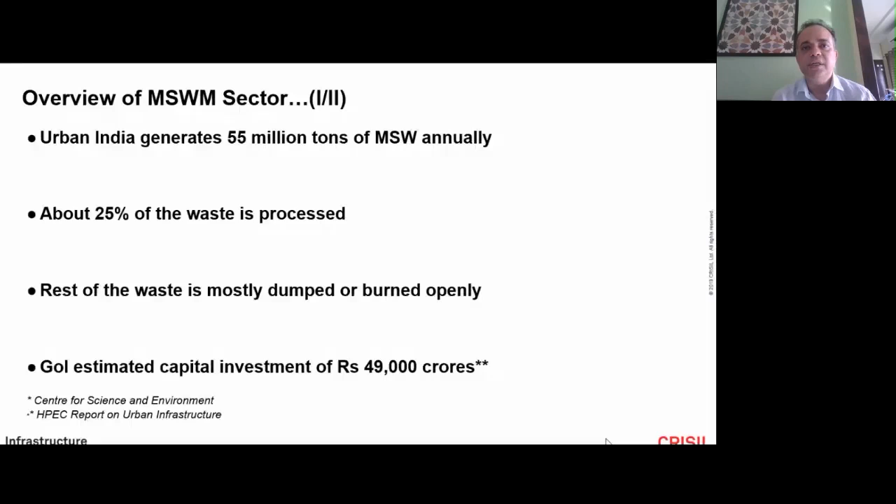So the element of waste processing and disposal required on scientific grounds is quite significant, as you see from the numbers, and the investment required is around 49,000 crores if you were to manage this waste correctly. But the message I wish to relay is that funding is something you can probably make available through various programs, innovative PPP structures, and some kind of dedicated grants. What is important to highlight is the way the entire waste management is happening, right from generation to its collection and eventual dumping or conveyance to the dump site, the sanitary landfill site, or the waste-to-energy site.

But what's very interesting to look at is the waste generation that's going to happen in the country because of increasing income levels, lifestyle changes, and rapid urbanization. If you look at the entire urban population today, which is close to around 40 crores out of the entire population of 120 crores, that's going to reach close to 50 crores or so in the next couple of decades. What's going to change is the waste generation capacity or levels, which are going to increase threefold by 2030 and ninefold by 2050.

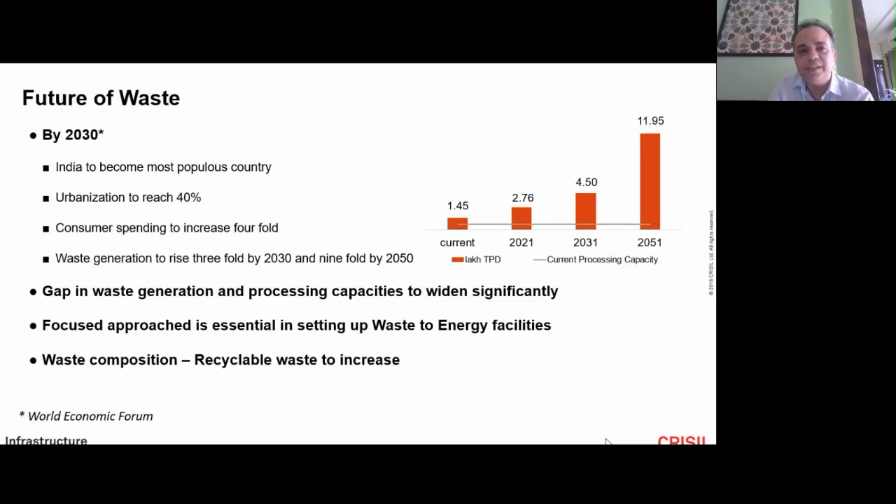There is going to be more recyclable waste, and given that land is always going to be scarce in urban areas, we require a more land efficient disposal strategy, and waste to energy can be one solution. Landfill sites are also being proposed, but we have to make sure not all waste goes into the landfill. What can be recovered has to be recovered. There's a norm typically in our transaction structures that not more than 20% of the waste reaching the disposal site can be put into the landfill, otherwise landfills will get exhausted very fast.

What are the issues we face at the ground level in cities? One is that collection and transportation is happening in a very informal way. The contracts typically awarded to private contractors are very informal, do not have any kind of performance standards, and that impedes contract enforcement clauses. So the informality of those contracts has to be done away with. They need to be more formal and more stringent.

To be fair to the contractors, one has to ensure they get an adequate contract duration period, which will allow and motivate them to invest. Short duration contracts of 1 or 2 years impede investments. Typically, investment contract duration has to be around 7 to 8 years, at least that's the life cycle of a vehicle deployed for waste collection.

There has to be good instrumentation to track the waste collection process. There need to be weigh bridges to understand what kind of weight of waste is getting collected and carried to the disposal site, because contracts are typically structured on a per ton basis. So you need good instrumentation to ensure the right waste is measured and payments are linked to actual waste collected. Construction debris also gets mixed in, given the contract being structured on a per ton basis, so the contractor may intentionally mix this kind of waste to ensure higher yield on his contract. This is something that needs to be checked at the disposal site.

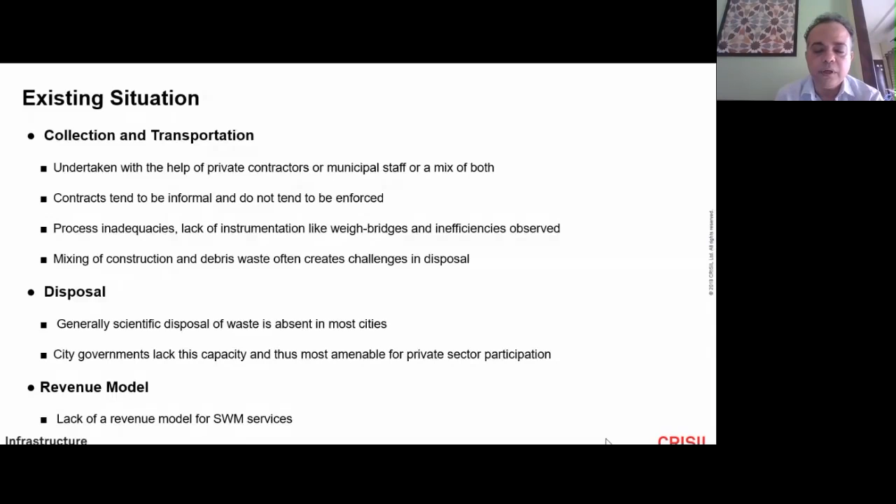What are the challenges on service provision? A lot of the waste to energy players or biogas players demand segregated waste at the disposal site, and we know that segregation is not happening at source. Just levying fines is not going to change consumer behavior, because enforcement becomes a challenge. There has to be a behavioral change, and there has to be an IEC activity that will lead to segregation happening.

Even where there is intent to segregate, the municipal collection system should allow for segregated waste to be collected and transported. Otherwise, if you're using the same vehicle and just mixing the waste, the segregation you collected doesn't mean much. So there has to be compartments within the collection vehicle which allow you to dump waste in the right compartment. Also, collection and transportation requires optimized route models, otherwise it becomes quite inefficient and there is increased cost of service provision.

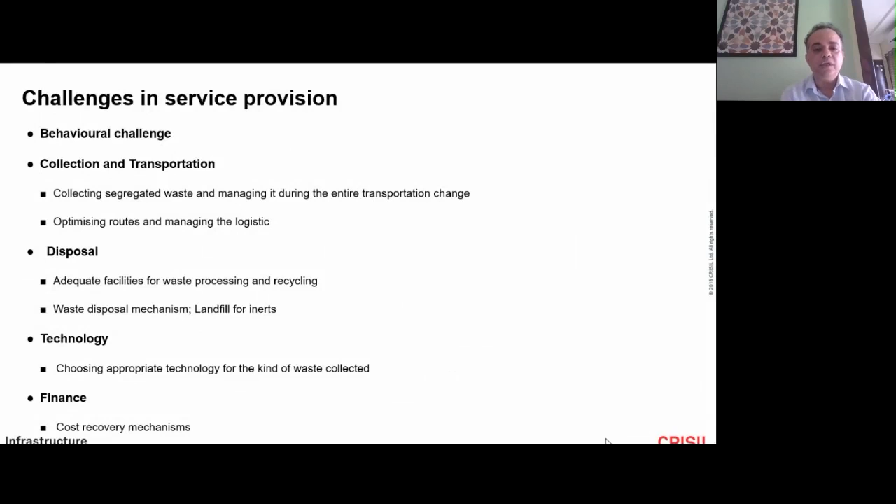The waste disposal mechanism has to have landfills for inerts, and whatever can be used for waste to energy purposes or can be recycled needs to be separated. Choosing the appropriate technology for the kind of waste collected is also important, and cost recovery mechanisms need to be put in place. So there are multiple projects happening in the country, and everybody is attempting it.

But success is proving elusive. It can be because of poor design, or the waste collection not happening in the right way, or the quantity of waste that is the minimum required may not be in place.

So there is an element required to check the feasibility of projects. Another important element in project design is that waste disposal is something the city should focus on. If there is some revenue emerging, that is a bonus, but revenue generation cannot be a driver for the project design. Otherwise, the contractor who bids on the basis of revenue generation may find those revenues not realized, and the entire project goes into getting abandoned, with disputes between the municipal agency and the contractor.

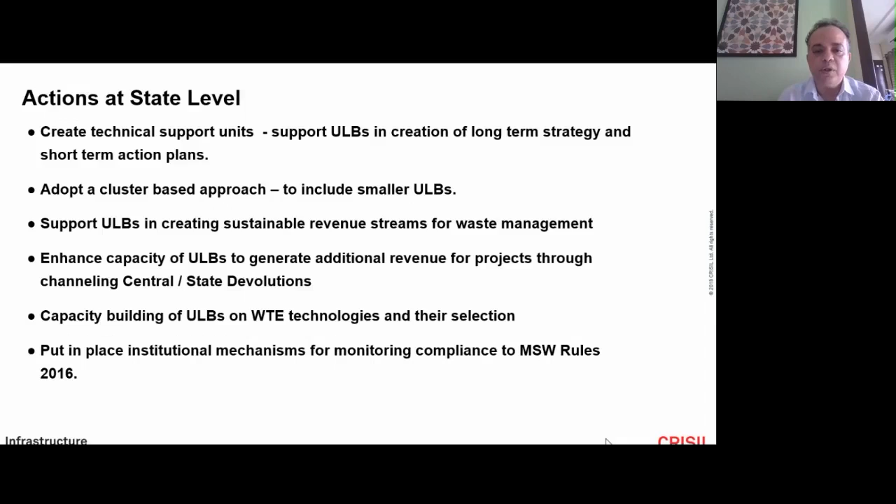Revenue streams need to be created by amending the act. There has to be capacity development of the local body to ensure we are creating feasible projects. And at the state level, they should not only do technical support but also monitoring and evaluation of the project being conceptualized and developed.

At the local level, I think there is a need to create a dedicated department called the Environment Department, which will look at solid waste management in a very focused way, and ensure that there's dedicated staff with the right skill sets to manage this process.

What is happening at the urban local government level is that cities have grown, but city governments have not grown with the capacity to manage this growth. The level of understaffing at the local government level is very precarious. The general impression of overstaffing typically is there at a very low level of unskilled staff, and that may also be changing. But the technical staff required at local level is very important.

There is also a need to engage citizens in a more proactive way to segregate waste better, and that needs a different kind of capacity that local government needs to develop. I think there is capacity to engage with citizens, and the pandemic has demonstrated that local governments have risen to the challenge of engaging with citizens in many states in a very proactive way. That is a good thing that can be leveraged for future activities like engagement for ensuring segregation happens in the right way.

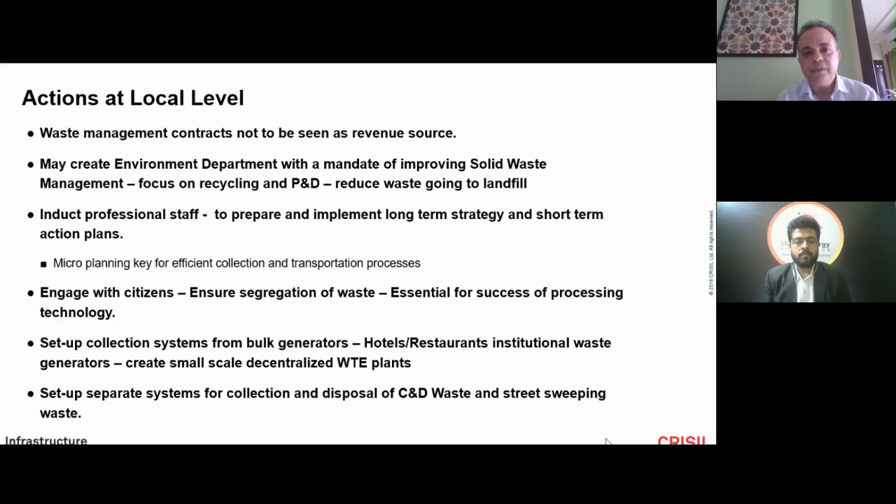So with this, I would conclude my presentation and open the floor for questions.

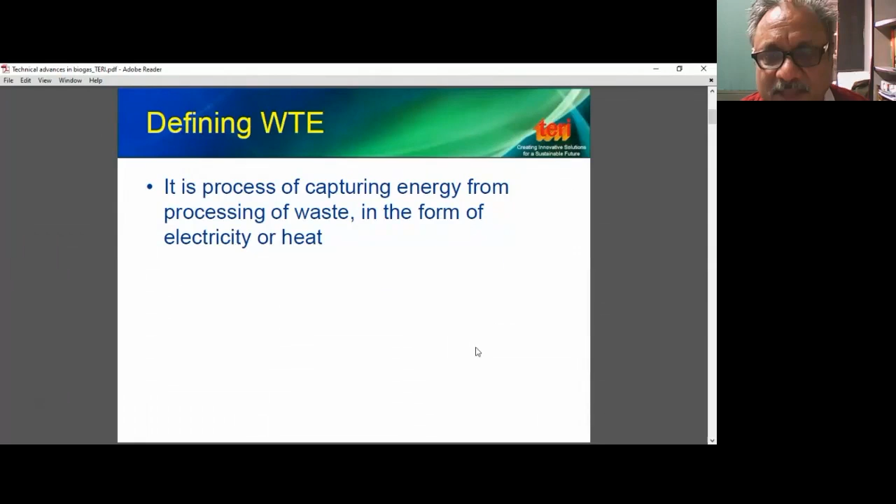So with this context, waste to energy has been discussed in previous sessions throughout the day. I'll start with a slide on why waste to energy projects are a problem, especially when looking at processing municipal solid waste. The way we segregate, collect, and process waste are problems in successfully operating waste to energy plants on a sustained manner over a long time frame.

One issue is variability in waste composition. We all know urban waste streams and daily consumption are not uniform, so our daily waste generation is also not uniform. The composition keeps changing.

In addition, if you look at overall average municipal solid waste characteristics across the country, on average around 50 to 60% of that is moisture. If we don't address this moisture, it can cause wear and tear and corrode the equipment in waste to energy projects. If inerts are high, they can not only cause fouling of the equipment but also cause physical damage to the system at times.

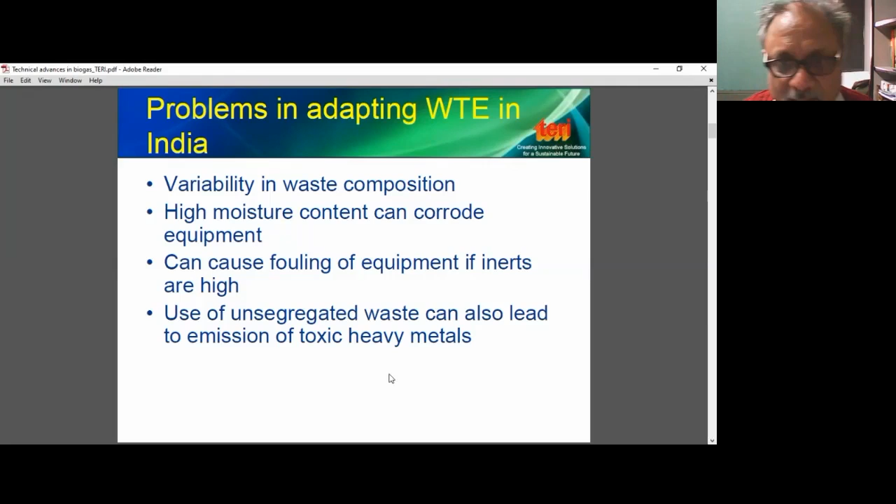Lastly, if the waste is unsegregated and contains toxic constituents because of poor separation at source, combusting such waste in waste to energy plants can lead to emission of toxic heavy metals. Not only toxic heavy metals, but also issues like emission of dioxins and furans if combustion profiles are not proper.

Just to give some historical background on India's experience with biogas - it's a pretty old technology in the context of biogas plants based on cow dung. There were plants under various government schemes installed on a large scale. On the municipal waste side, however...

We started significant projects of significant capacities around the 90s. The plant in Pune was started as a pilot plant using technology from Paques, 5 tons per day capacity, started in mid-90s, was subsequently closed because of operational problems.

There was a plant in Vijayawada using segregated municipal solid waste, 16 tons per day, and a slaughterhouse waste plant at 4 tons per day, with technology from Mailhem. Colonel Rege is here - he would be the right person to explain more about that in case there are queries.

There was a plant in Chennai, and a Koyembedu flower market plant to address flower market waste, of capacity 30 tons per day, based on Austrian Bima technology. Since this was technology imported from outside, there were small problems in terms of maintenance, and the plant had to be closed down for say 6 to 8 months for want of spares. So many times, with imported technologies, timely supply of spares is also a problem - it can hinder continuous operation of your plant.

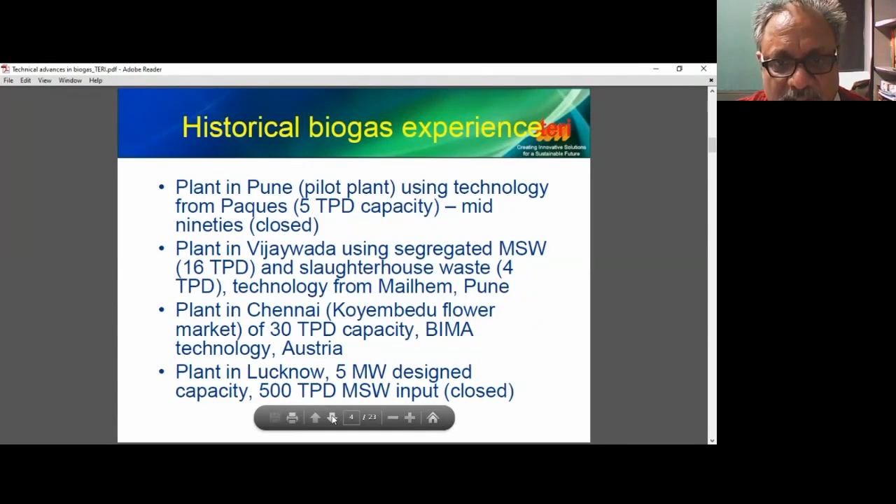I'll try to capture that learning in subsequent slides. I've divided my presentation into two parts: one looking at mechanisms and ways to enhance biogas production in a reactor, and second, after producing biogas, how to make value-added use of it by enriching it further for value-added applications.

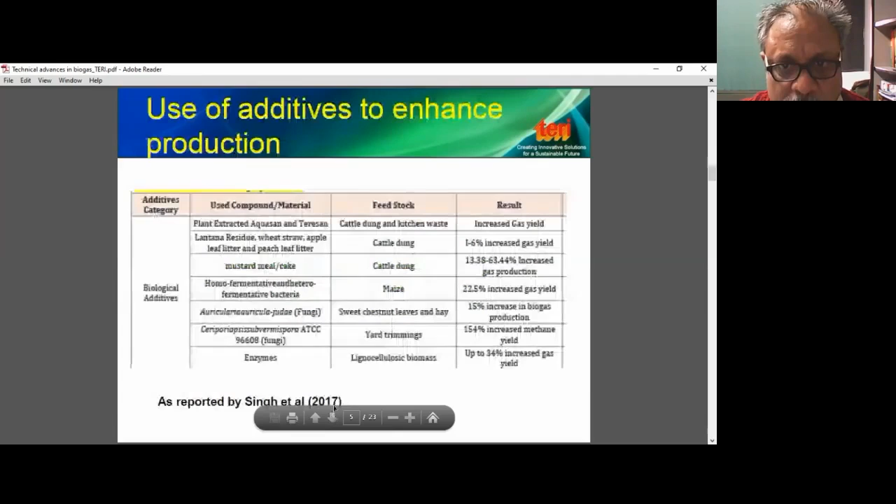Looking at literature, there are two ways to enhance biogas production. One important way is to use additives, which fall into two categories based on various reports and work by researchers for various feedstocks - from cattle dung to kitchen waste to yard trimmings and lignocellulosic biomass. Researchers have experimented with various biological additives.

The first column gives you biological additives which have been experimented with, and increased gas yield to various levels have been reported. This showed that there are biological additives which can actually increase gas yield.

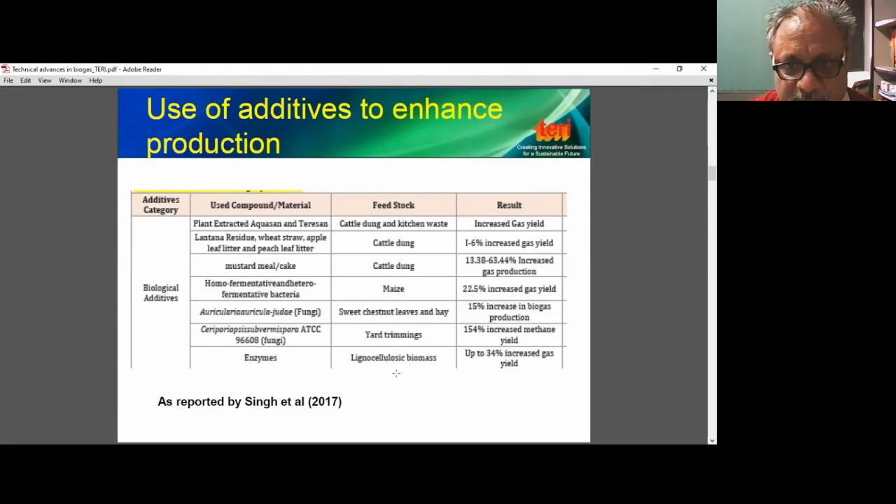The other process and design related changes which various reports and researchers have indicated have resulted in increase in biogas yield. These are simple processes, but they have certainly resulted in increase in biogas yield. Pre-treatment, various processes of pre-treating feed before feeding it into the digester, has resulted in biogas yield increase.

Research also shows that if digesters are designed sun-facing, the sun keeps them warm and the biogas yield is increased. Similarly, researchers have also worked on solar panel assisted digestion systems, where you can not only heat the digesters but also feed heated water to the digester.

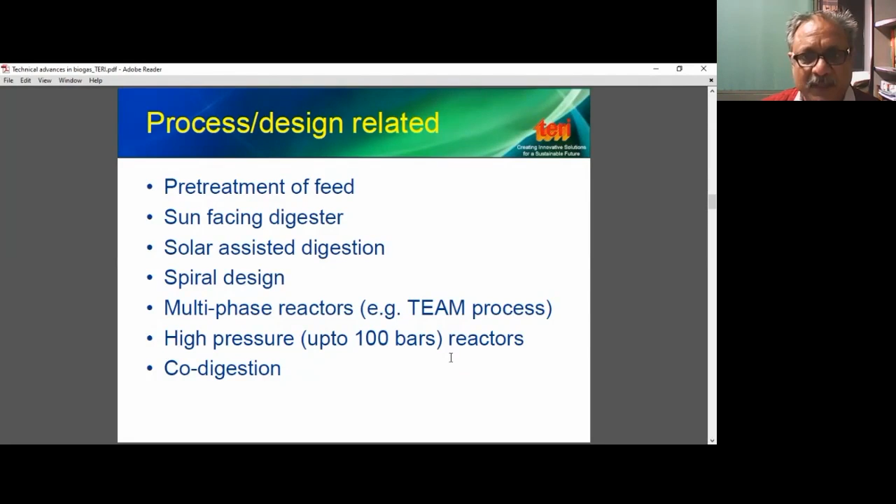Co-digestion for feed with low volatile fatty acid, if you mix it with other feedstocks, has also resulted in increased gas yield. This co-digestion is now especially used for sewage sludge, because sewage sludge has been a problem for long, and not many cities have an effective plan for dealing with it after treating the waste sewage water. Many researchers are now trying to co-digest that with various feedstocks, including municipal solid waste, and optimizing the conditions so there's a significant increase in biogas, and project viability also improves.

It can be a commercial cooker, a rice cooker, a water heater, thermal application into water heating, but it can also go further, for example, conversion into electricity.

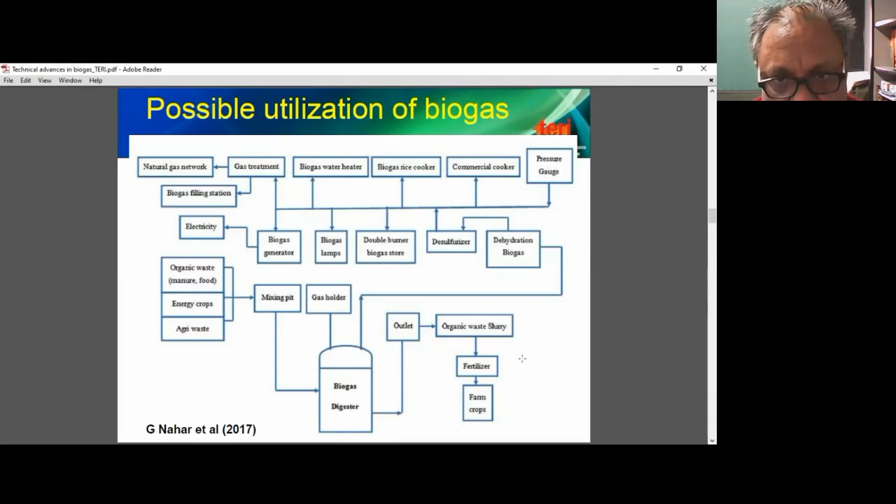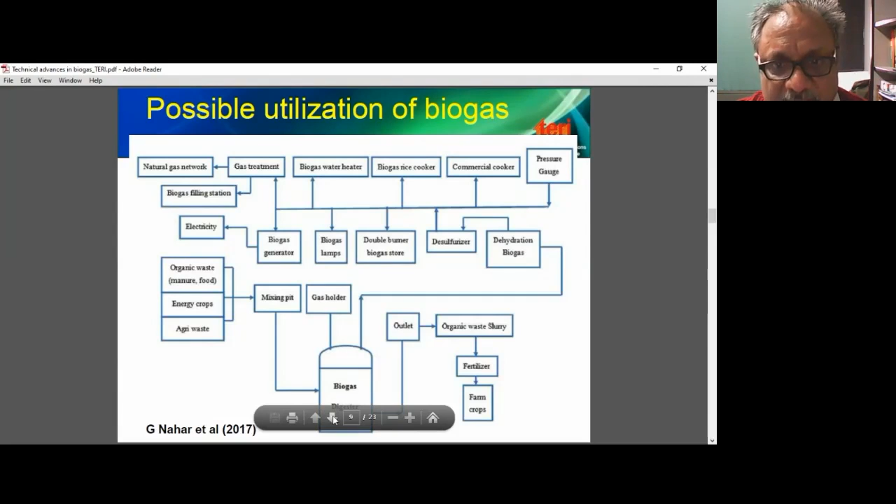Also, the gas which is generated, which I'll discuss later, after further purification can go to the natural gas network. Now the second part of my presentation is about valorization of biogas, how to get more value from the biogas you get, and this falls into the category of upgrading biogas systems.

There are various technology options. I'll not discuss them in more detail for want of time, but we can discuss it if required in the Q&A session.

Water scrubbing, most popular with or without alkali, removes H2S and other gases, and also removes CO2 to enrich the biogas. Solvent-based scrubbing, again to remove CO2, uses chemical absorption. Pressure swing adsorption is very common and very popular now with CBG projects. Membrane separation is slightly expensive to operate, so not much uptake as of now. And the most futuristic is cryogenic separation, done at sub-zero temperatures for CO2 removal, but again a very costly option.

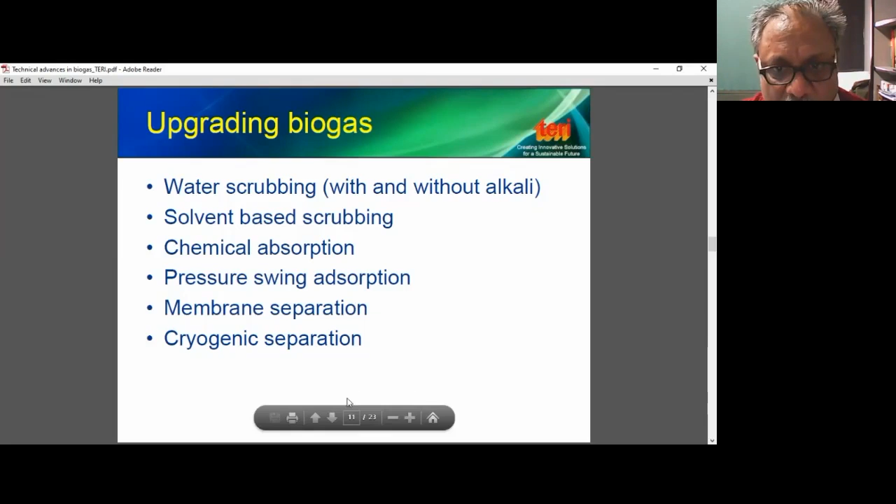Now, looking at biogas history and how projects have developed, we are starting from very simple thermal applications. I'll discuss very briefly the technology which we developed at TERI, since initially I discussed about the multiphasic reactor.

What we have done is come out with a design which is biphasic, for application up to 1 ton, 2 tons per day. The design is fairly simple and easy to operate, and we have separated the acidification process and methanation process into two different reactors. In the first series of reactors, we leach out the waste, and this leachate which comes out after acidification is fed to the UASB reactor.

We have adopted UASB reactor for the biomethanation process, and the gas which comes out is very rich in methane. For most substrates, we get gas with higher than 70% methane content.

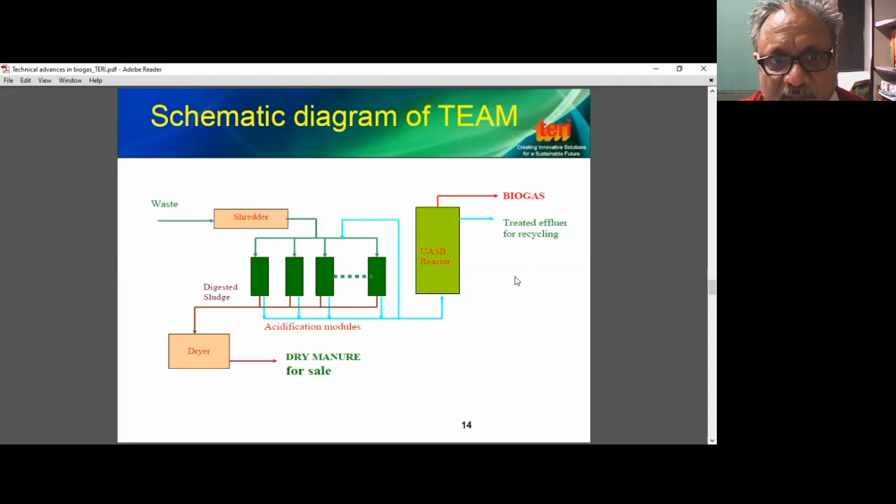The slurry can be processed again, wastewater into dry manure, and water which is recovered can again be used in making slurry in the wastewater system. So in a way, it's a closed loop system with very little requirement for extra water once the process gets going.

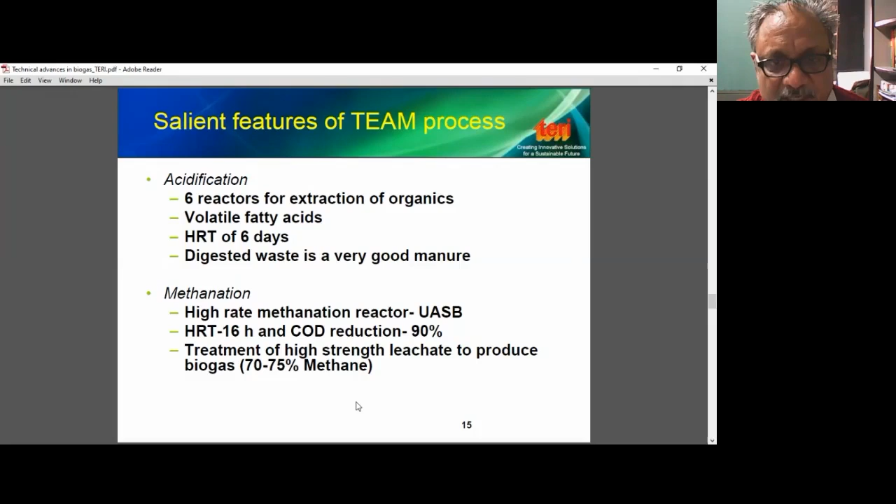So these are some details. HRT, which we can achieve, is 6 days, and digested waste is very good manure. In the biomethanation reactor, the HRT is 16 hours, and COD reduction we can achieve is around 90%.

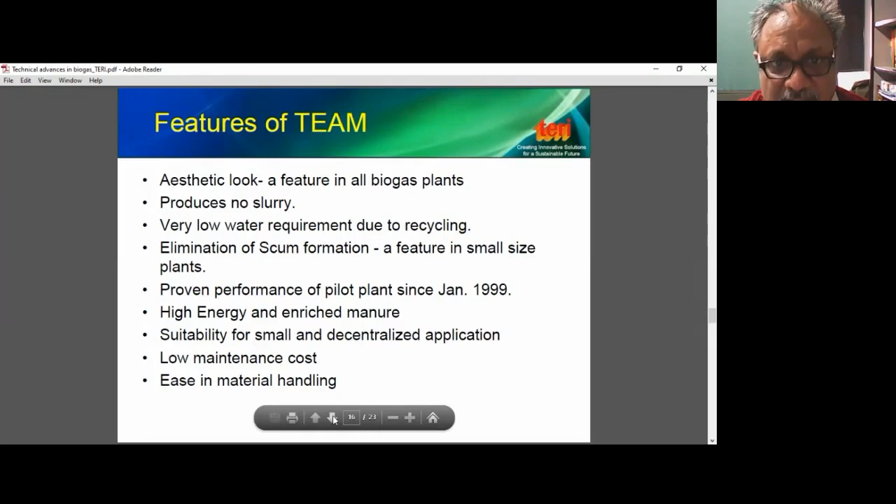It produces no slurry, has an aesthetic look, and very low water requirement due to recycling. Since you are putting leachate into the biomethanation process, scum formation is generally not there. We have been implementing this in industrial premises since January 1999, though there are challenges doing it for municipal solid waste because of variability and inconsistency in what you get as waste.

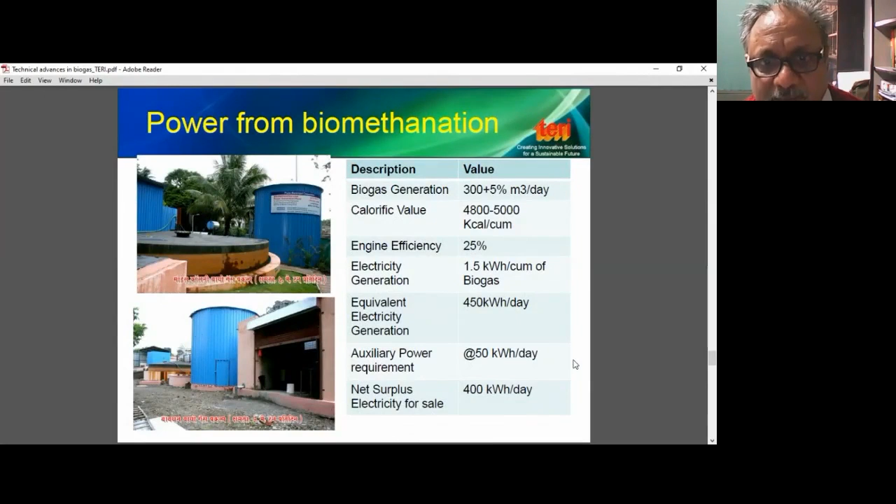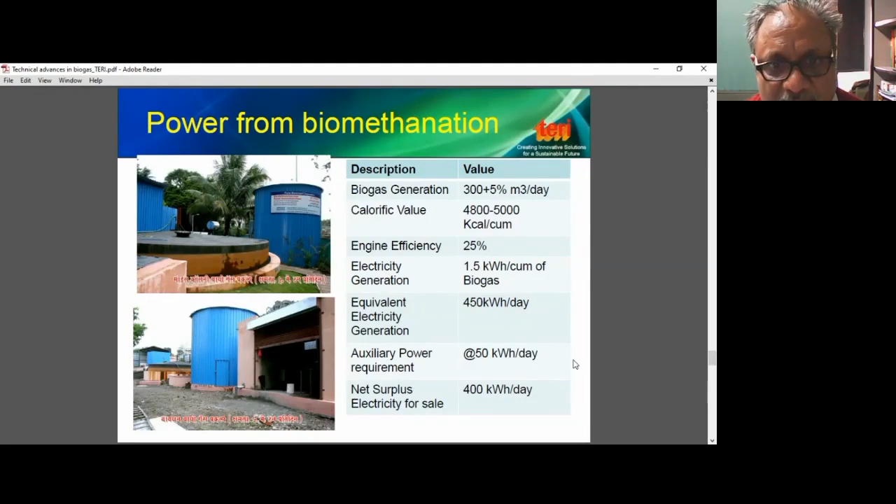Though a power production module increases the cost of biogas plant operation, there are processes which have shown that power production is possible. Subsequently, because of IOCL's purchase assurance for compressed biogas, plants are now starting to operate at a much larger level.

For example, this is a 20 tons per day plant at Indore, installed by Mahindra, with compressed biogas production of 800 kg per day and methane content in excess of 95%.

So this is how the evolution of biogas has happened in India. Given the support now coming for alternative uses of biogas other than electricity, thermal, and cooking applications—since in our country thermal requirement is generally not so much, being a tropical country—this is still looking promising.

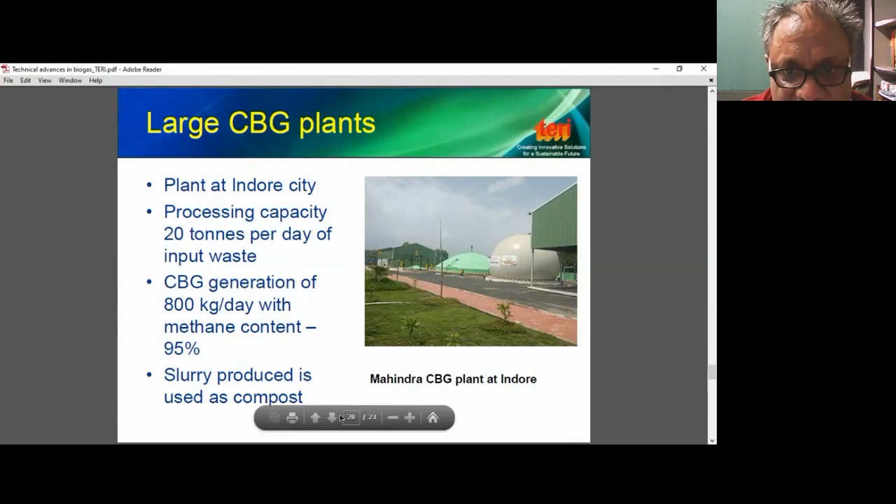So with this, I'll quickly conclude by saying there's still a gap. If you're looking at further utilization of recovered methane into various other things like second generation biofuels or important chemicals and biochemicals, there's still some gap between technologies being developed by various research institutions or universities.

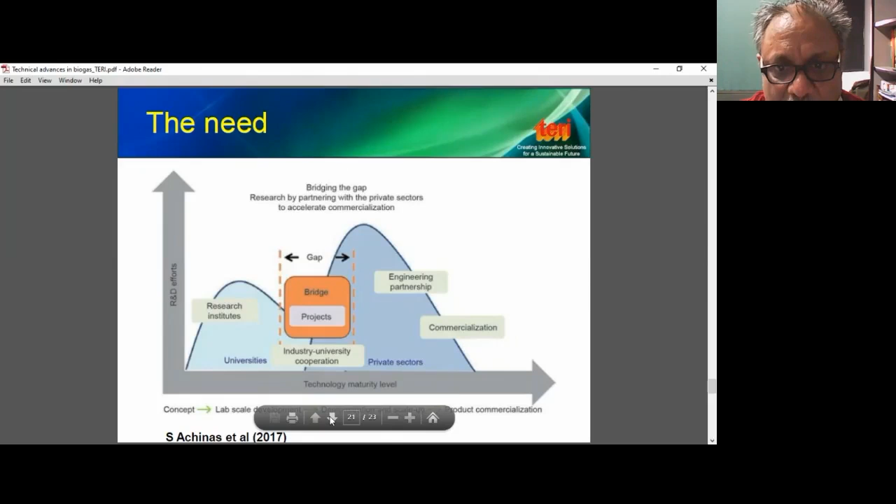To bridge this gap, there's a need for private sector infusion of funds, and there are certain R&D challenges which need to be addressed for making the sector more feasible, especially if we are looking at waste to be valorized.

Because the fact is, on average, the waste which a country like India generates has high moisture content and low calorific value. If the waste can be sorted into an easily degradable fraction, which is our green waste, then there is no reason why biogas technology cannot be successful. With this, I'll close my presentation, and thank you so much for your kind attention.

If there are any questions, I'll be happy to take them up.

The word Mailhem itself is very significant. Mail in Sanskrit means waste, and hem in Sanskrit means gold. We thought of converting this waste to gold almost 25 years ago, when people didn't even think about it. Today it has become the buzzword, but we thought of it at that time.

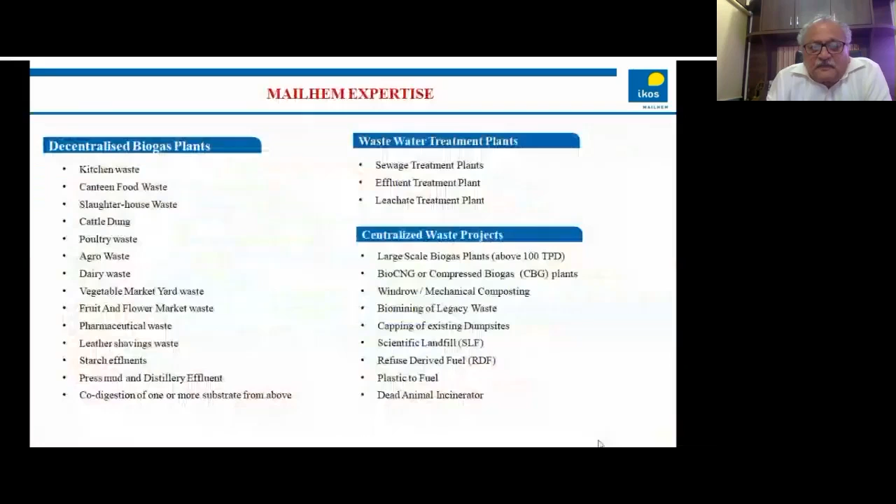If you look at Mailhem's expertise on the left side, anything which putrefies—jo bhi cheez sadti hai—can be converted into biogas. That is our expertise. Jitna bhi smell, the dirty acidic smell, that is a better waste for converting into biogas.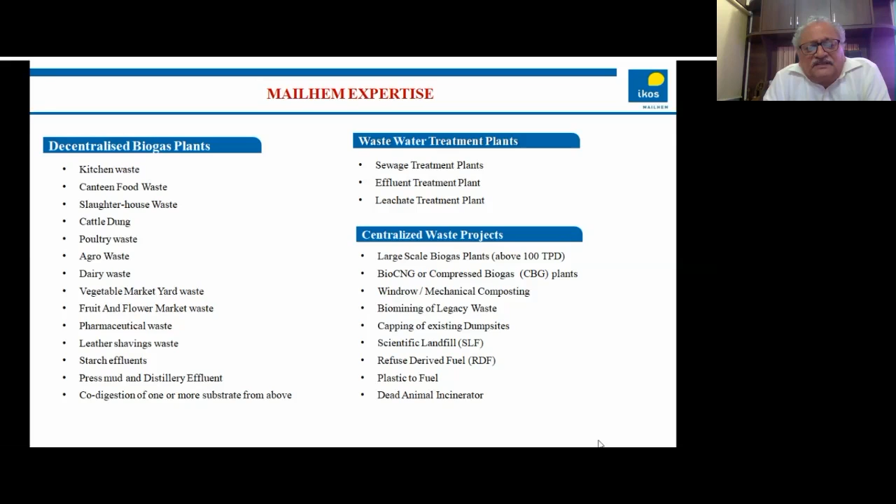On the right side, if you look at it, today we have gone from strength to strength, from small 100 kg to 1 ton plants. Now we do hundreds of tons in integrated solid waste management plants.

I don't have to show credentials. We have more than 325 biogas plants all over the country on different substrates. I would invite any one of you to go and visit any of the plants—you don't even need permissions. We have experience on different substrates garnered over 25 years doing what people are talking about doing today.

If you look at the map, most of our plants are towards the south and central India, and we are now trying to get into Uttarakhand because we have just recently bagged a 50-ton project on segregated municipal solid waste at Rudrapur. So we would have a few more dots in the north also.

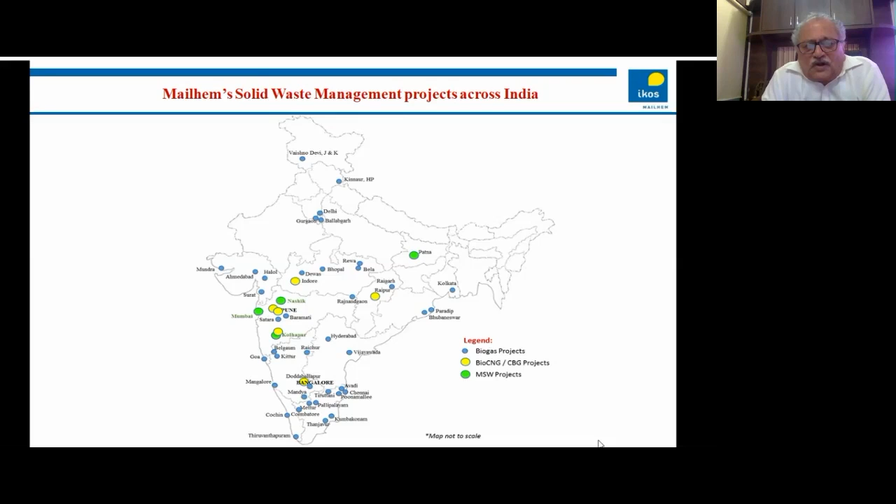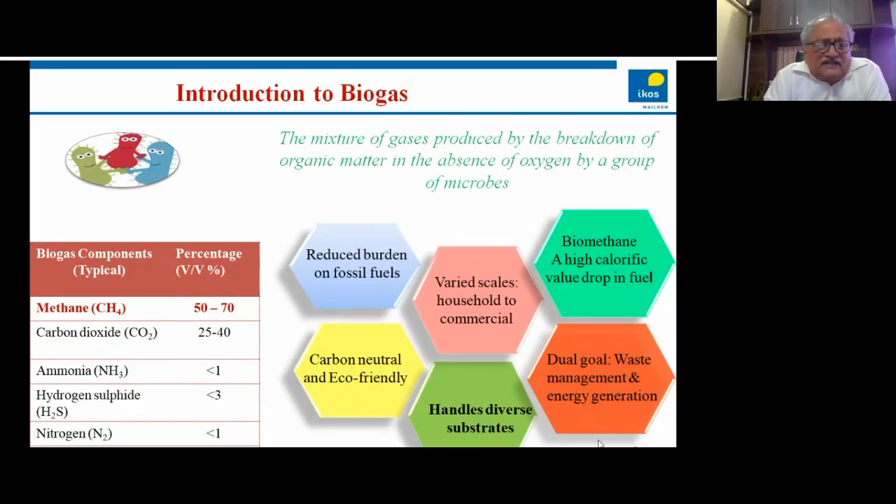But let's get on to the biogas. I'm not going to get into much detail since Pandey Sahab has already explained it. Basically, biogas composition is about 50 to 70% methane depending on the substrate, carbon dioxide 25 to 40%, and ammonia, hydrogen sulfide and nitrogen less than about 1 or 2%. It's a mixture of gases produced by the breakdown of organic matter in the absence of oxygen—that is the critical part of the biogas plant.

Now the applications—when we started, it was basically for cooking. Everyone thought you were doing a wonderful job if you could replace LPG. Later, we got into the business of generating electricity.

If you recollect, when we started there were dual fuel engines—they used to talk about putting in about 30% diesel and 70% biogas, but on ground it was actually the other way around. Then, slowly but steadily, people started getting 100% biogas engines. Cummins and Ashok Leyland today have 100% biogas engines.

Then we started getting the use for heating—and mind you, heating and cooling are simultaneous; either you heat or you do the cooling part. Thermax absorption chillers could also do the cooling part. Then came bigger electricity generation power plants, with gensets available from GE, Wärtsilä, and Caterpillar.

And now the latest thing is making it into auto fuel. Pandey Sahab explained the upgradation of biogas—basically, if you can make it beyond 90% CH4, you can easily convert it into auto fuel. We now have plants like Mahindra's plant in Indore, and one that was just recently visited by the petroleum minister. This is going to be the future of biogas plants, because all oil marketing companies have been given a mandate to put up a minimum of 5,000 biogas plants.

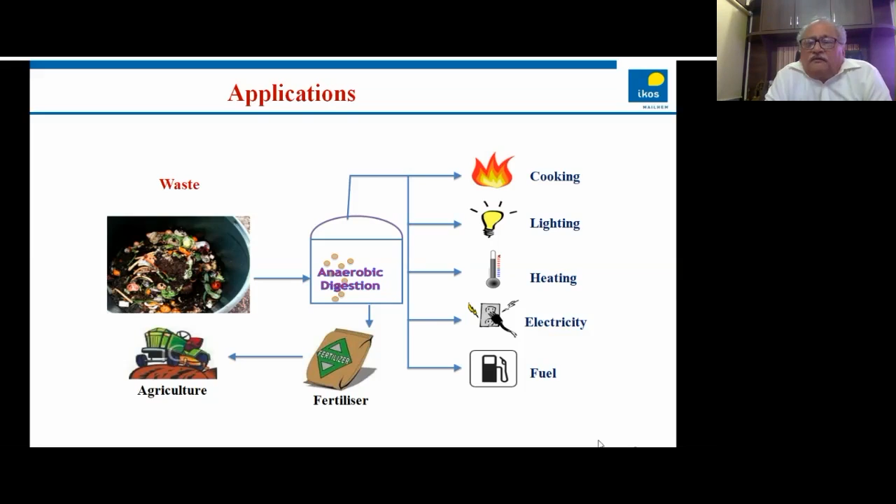The substrate doesn't matter—it could be agro waste, food waste, municipal solid waste, anything that putrefies, so long as you produce 2 tons of compressed biogas. Indian Oil, BPCL and HPCL are willing to buy this from you at 46 rupees. And if you can have a guaranteed buyback, banks will come forward to fund these projects, which was a major issue till now.

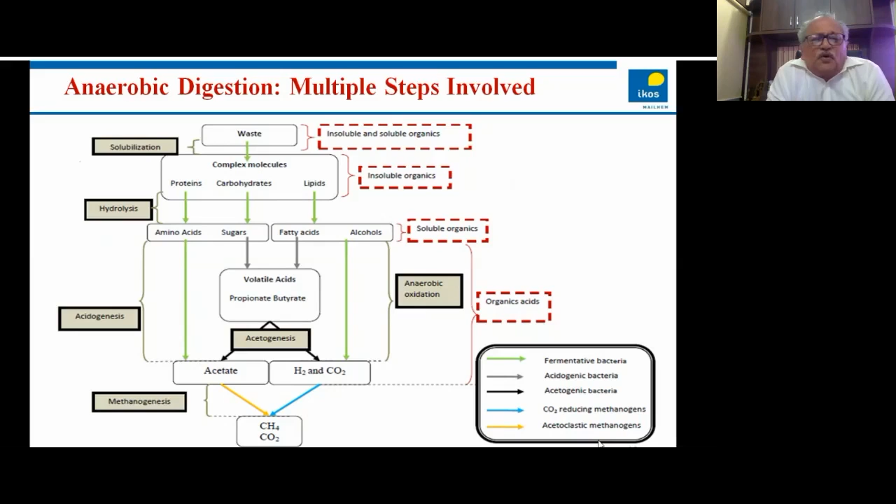The anaerobic digestion process has multiple steps—if anybody is interested, they can always come visit us in Pune or any place and we'll give more details. The 4 stages are solubilization, hydrolysis, acidogenesis and methanogenesis. I'm not going to go into the details, but I'm sure the Mission Energy people will put this up on their website so you can access these details.

For your information, the oldest biogas plant was set up in 1859 in Mumbai. But actually, the commercial use of biogas and its upgradation started in the late 90s. That is how these things have evolved.

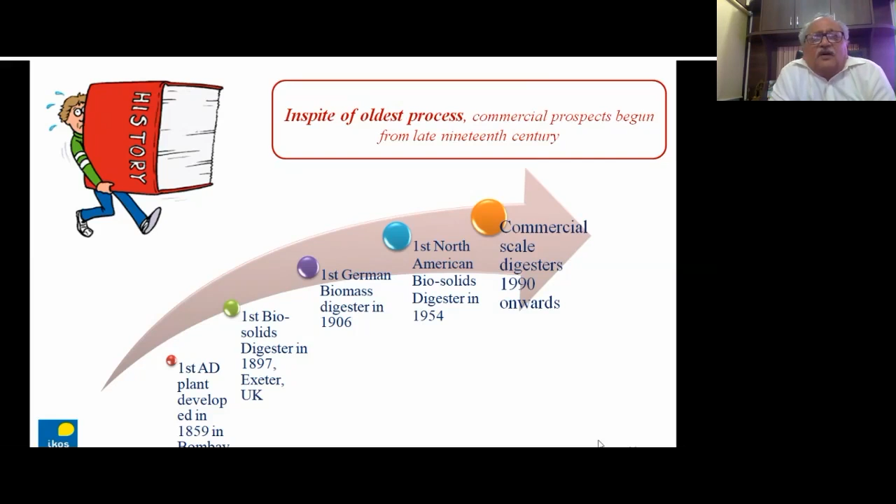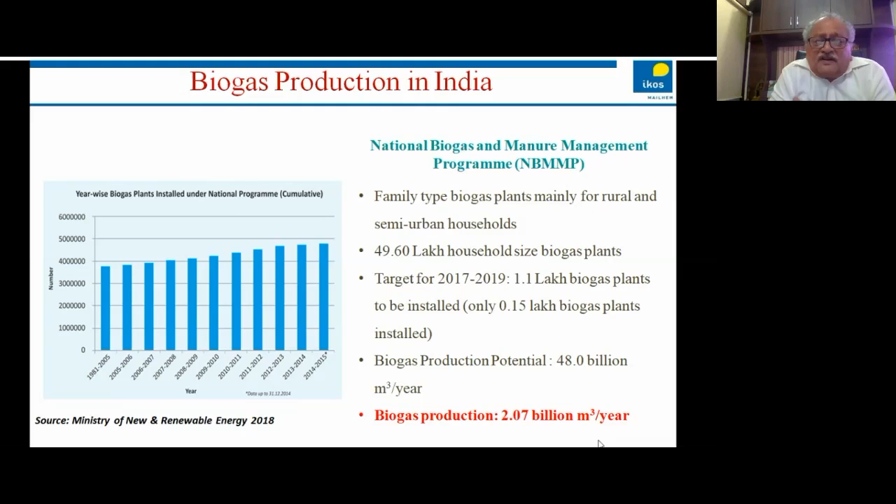I will not tell you more about it. You can open the MNRE site and get all these details on how many biogas plants there are. What I'm more interested in, rather than the small biogas plants, is what is the potential that we have today from biogas plants.

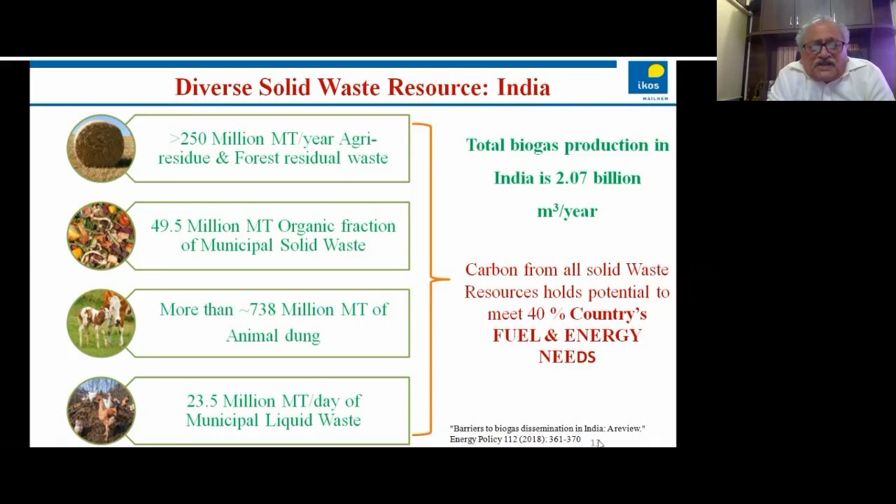The point I'm trying to make, and I want to emphasize this very strongly, is that all this while we've been talking of the potential. I've been in this line for more than 25 years, and I'm hoping that the day will come when this potential will be generated on ground, and it will not only remain a potential.

Now, what was the problem? Why couldn't we do it earlier, and why are we talking of it now? Because earlier, most of these biogas plants were low-rate biogas digesters, the KVIC designs, which were very good for rural energy and rural villages, but couldn't sustain at higher capacities. Then we had different types of biogas plants.

Whatever the problem, there was no mixing provision. The hydraulic retention times were 30 to 100 days. The organic loading rates were very low. The entire substrate which we were feeding into it was never being fully utilized. A simple example is your gobar gas plant: you put in the entire cow dung, and most of it, barring 30 to 40% which is converted into biogas, comes out as slurry.

Of course, it is all right in the villages because you can use that slurry which comes out, the 70% unused material, as manure for farms. But this cannot happen in the cities. What you are looking at is much better digestion for the substrates being fed. You want more than 90 to 95% of the substrate fed in to be converted into biogas.

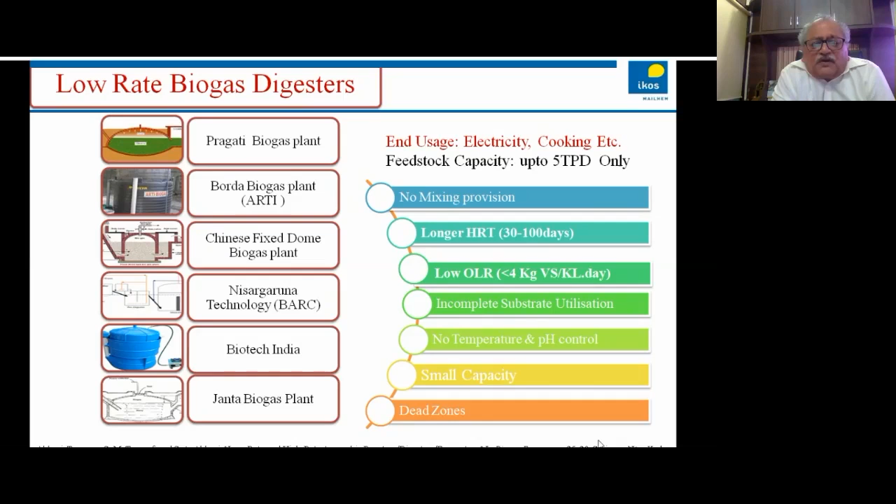Then there were no temperature and pH controls, and that is the reason why we had so many problems with these biogas plants. These plants could only be of small capacities, and most of these had dead zones. The dead zone means whatever substrates were put in were not fully utilized, so at a certain stage you have to open them up and remove the substrates which were not being converted into biogas.

This is a summary of the drawbacks of the existing low-rate solid waste anaerobic digester technologies, which were being used for some time, till the 90s or late 90s.

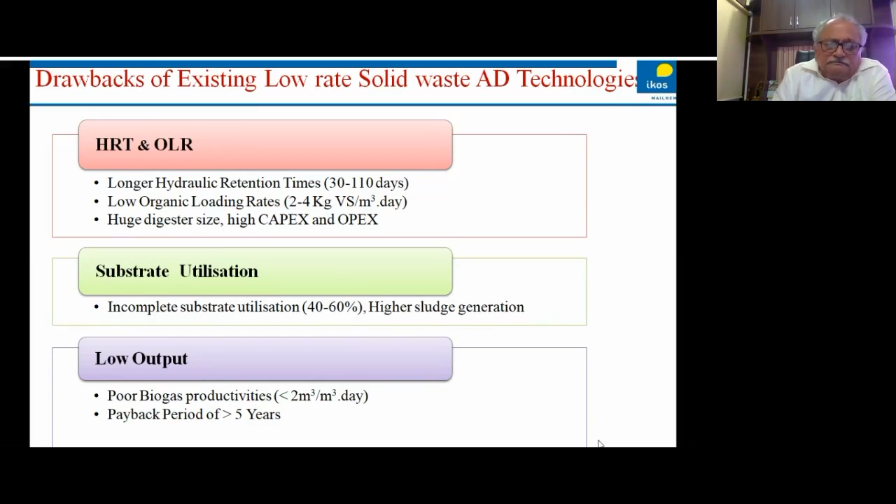Now, how are we trying to improve the biogas yields and productivity? The first and foremost is pre-treatment. Earlier, biogas plants only talked of organic waste like cow dung, human excreta, or at most food waste. Other substrates with plenty of lignin could never be used, and that is why substrate pre-treatment has assumed a very important part in this biogas yield improvement.

Then you can have fortification with lacking supplements and additives, which you can add to get much better production. Similarly, there have been phenomenal improvements in digester designs, which I think Pandey brought out very well, with advantages that have helped us get better yields and production across a number of substrates.

Who would have thought that even stubble burning, which is creating so much of a problem in the northern region, could tomorrow, maybe another year or two down the line, be utilized to generate biogas? People used to say it has too much lignin, you just cannot do it. But today it is possible, because of substrate pre-treatment and the supplements and additives which were not there earlier, to easily utilize these. Today, the aim of everyone in this line is optimization of the reactor operating parameters.

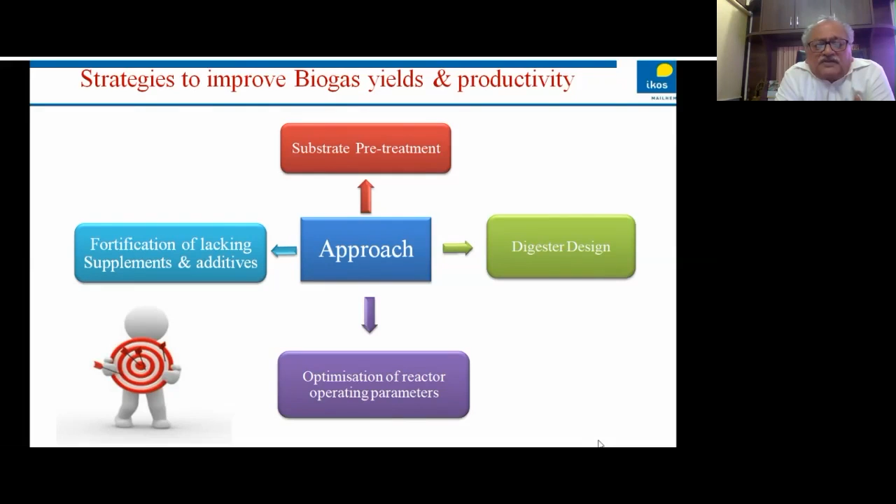Solid feedstock pre-treatment, it could be biological, chemical, physical, and combined. Now all these are available to us today. We don't have to look abroad. We have all these technologies, all these institutes, TERI, ICT, they all have put in a fair amount of effort to get you whatever you need. All that you need is to tap the right people at the right time.

This will reduce hydrolysis time, improve the feedstock degradation by 5 to 30%. You can well imagine how much generation of biogas will be increased if you use these pre-treatment strategies, and how many substrates you can add to your biogas.

This helps because if you recollect, earlier days people used to talk that a biomethanation plant requires a single substrate. But today, what we have specialized in, especially my group specializes in, is co-digestion. It can be different substrates because today the availability is dependent on the season and on the areas where you are putting up your plants.

So you need to think, before designing, how many substrates or what material is available to you, because with my experience I have seen that generally it is not the failure of the technology why these large size biogas plants have failed at times, but the basic failure of logistics. If you do not consider that you are going to get different types of waste in the initial design stages, it is extremely difficult to make it a successful biogas plant.

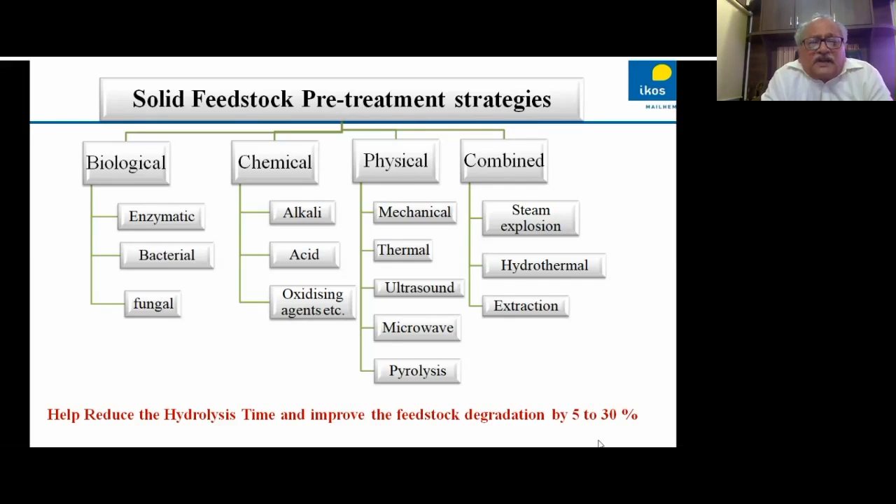If you put up a 100-ton plant, you need to feed it a minimum 50% of capacity throughout the year. You cannot say that for 3 months I'll feed it, and 2 months I don't have the waste so I'll keep it hungry. No, it doesn't work like this. And that is where the failures of these large size biogas plants have come up.

Additives for improved biogas, this fortification which I said, today there are n number of enzymes, micronutrients and trace elements available which will benefit optimum activity of enzymes and microbes for stable plant operation, prevent acidification and prevent biomass washouts. This is very critical if you're looking at this biogas technology at a commercial level.

Mind you, you're investing huge amounts, so you need to give the investor the comfort level that you can produce this not only for a few days, but for many, many years to come.

Advanced high-rate biodigesters, like Dr. Pandey has already said, you have various technologies. We had upflow anaerobic sludge blanket, we started with that, but it was basically initially only for liquid waste. Then through homegrown research and development, we had a modified UASB where we could take substrates which had more suspended solids.

Similarly, the continuous stir tank was a very standard design, especially in German type biogas plants. Today we have made an ideal combination of upflow anaerobic, modified UASB, and CSTR. This is what I'm saying, that advancements are an ongoing process. You've got to do it on ground, learn the hard way, and whatever you learn from past experience you have to put it on for your next plant, and you will always get better results.

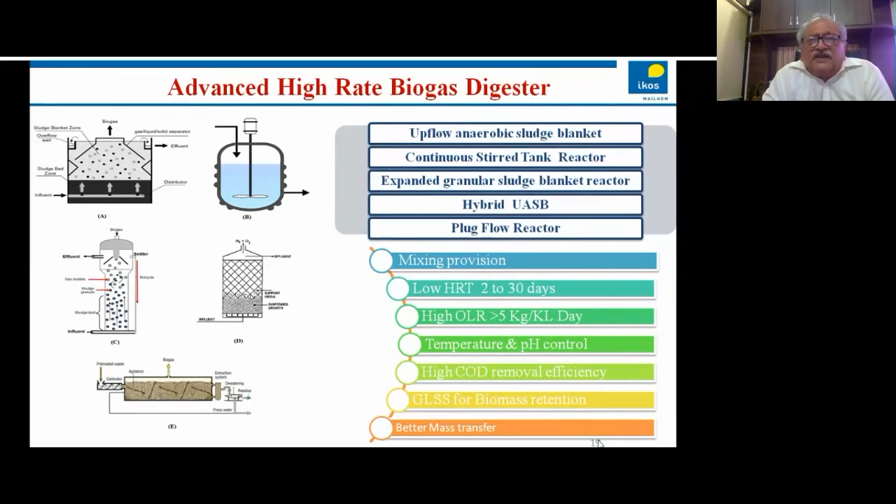Here I would like to say that even dry digesters are coming into India in a big way. Now these dry digesters have an advantage, take for example poultry waste. Poultry waste requires a huge amount of water if you want to use it, but the poultry people do not require this water, so they don't have a use for it. That is why in places and areas where you don't require the slurry or liquid water coming out of it, dry digesters will also be a big success for substrates which require less or more water.

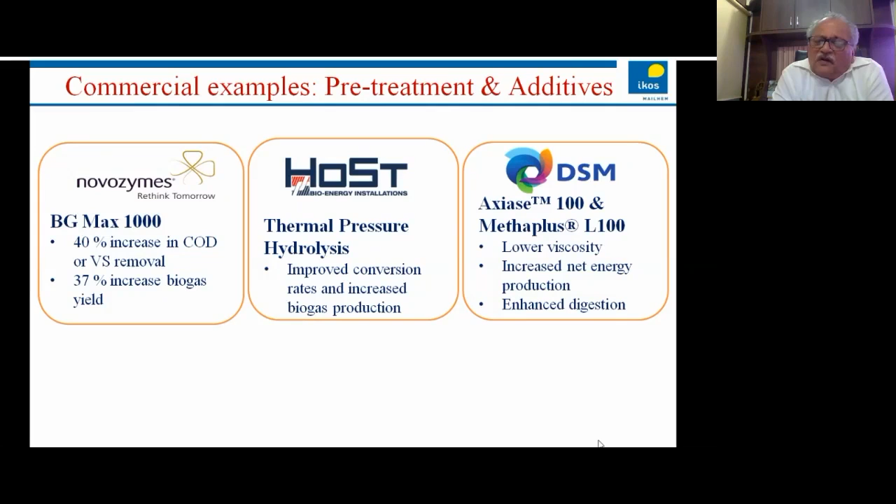This is the same thing I mentioned: shorter HRT, maximum substrate utilization, and high output. These are some examples of pre-treatment and additives available: Novozymes, thermal pressure hydrolysis, and Methaplus L100. These are all things available in India today which can improve the potential of biogas.

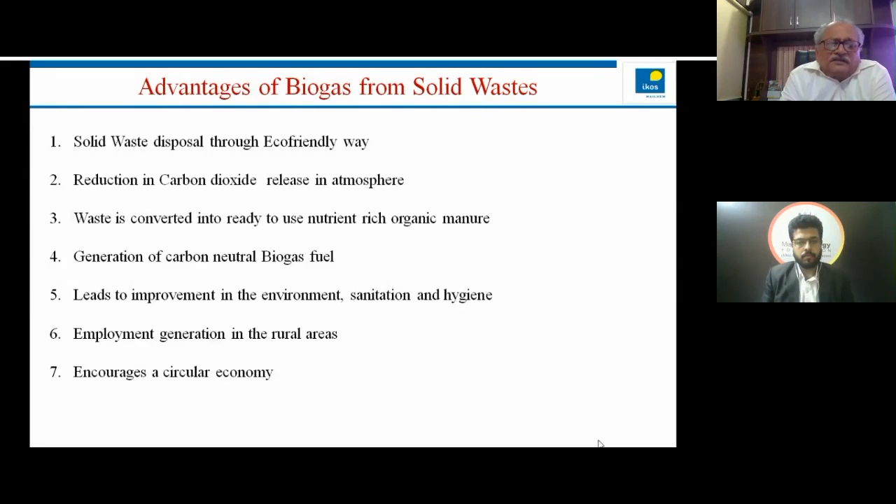Being in this line, we have got a few accolades which I would just like to flash. We were awarded on the first anniversary of Swachh Abhiyan on 2nd October 2015, the award as Garbage Guru, by no less a person than our Honorable Prime Minister Modi. Very recently, we got the award for Operational Excellence in Biogas by the Indian Biogas Association as a winner. We have been concentrating on the quality.

Way back in 2012, we had the Quality Council of India Award for maintaining quality in biogas all over the country. Today, like I said, we have been declared, at our Nashik plant of 500, as the best city compost supplier. So this is the one, and last but not least, one was given a Lifetime Achievement Award.

Jokingly, when receiving the award, I said, when you give a Lifetime Achievement Award - this was in '16 - we are generally either kicking him upstairs or asking him to call it off. But I am one person who, till the last day, has that passion, and you'll keep hearing me in these biogas sessions, whether you like it or otherwise.

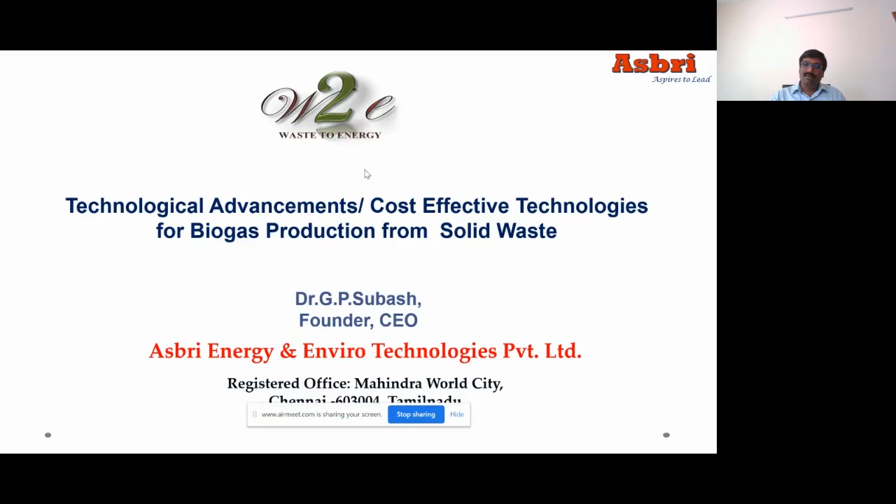So thanks for the opportunity to present about this technological advancement in the production of biogas from solid waste. Our company, Asbri Energy and Enviro Technologies Private Limited, is mainly focusing on biogas and bio-CNG production from various organic material. Here we are mainly focusing on gas which can be from MSW, or from other industrial and other applications, that is, from waste.

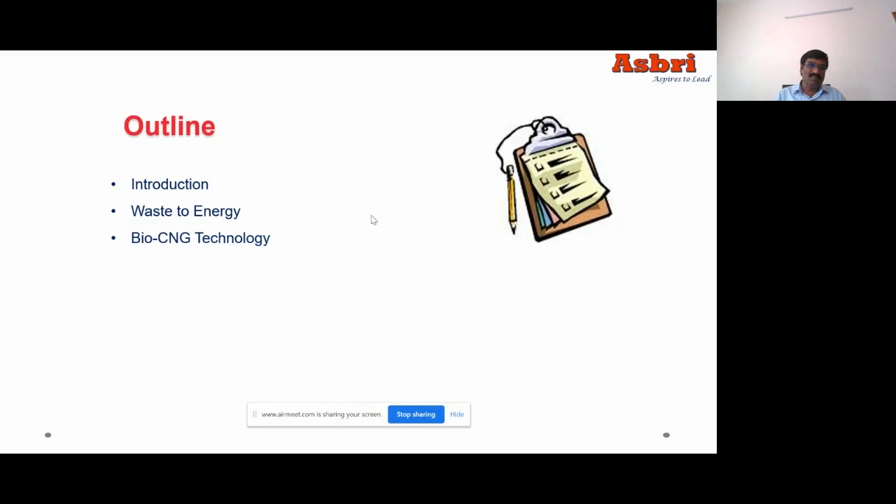I'll be giving the introduction about what biogas is and other things. I think a lot of people already covered this, so I may skip it. Then what is waste to energy at present, and what is bio-CNG technology, so I can discuss that. This is the current scenario in India.

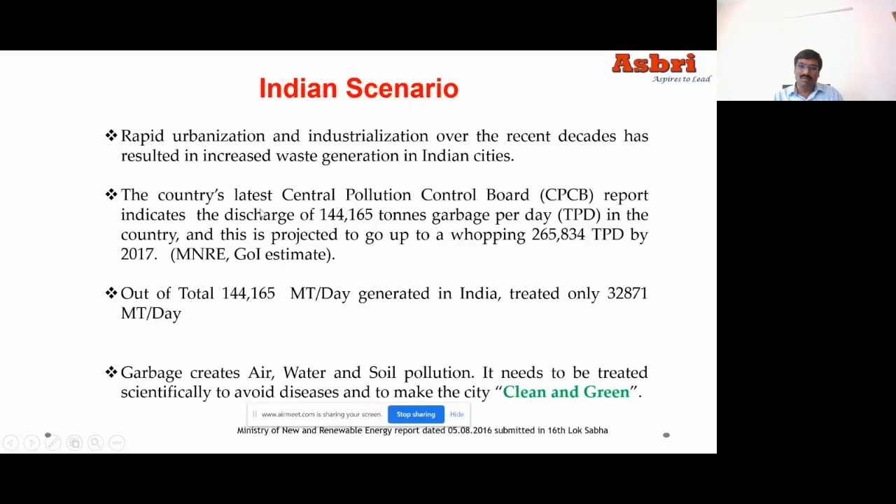These are CPCB data and MNRE data, I think from two years before. So even you can see there - in India per day we are producing around 1,44,000 metric tons of organic waste. I'm talking about only the municipal waste. You can see we are treating only around 32,000 of the waste. That means in this field a lot still needs to be done, and even for companies entering, they have huge potential to work on these bio-CNG and biogas projects.

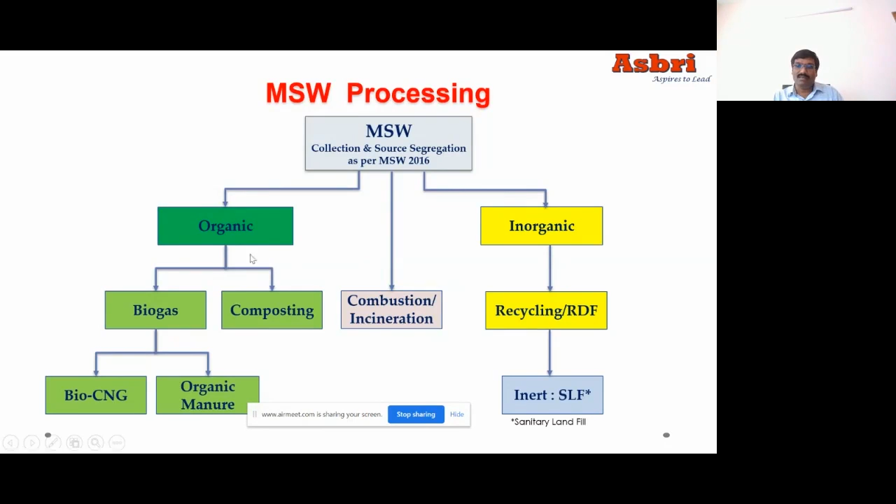At present in India, MSW processing is usually divided into 2 to 3 categories. The mixed waste is first segregated into organic and inorganic. For smaller projects, the organic waste is composted as is, but for bigger projects, say 50 tons and above, it's viable to go for biogas and bio-CNG. The byproduct from biogas projects is organic manure apart from CNG. The inorganic materials like plastics go to the material recovery facility, where we take out RDF material, and the inert material goes to the SLF. This is the technology presently used in India.

After the MSW 2016 rules, there is now great concentration on new technologies for scientific waste disposal. The municipal corporation also enforces rules on bulk waste generators and citizens that they have to source segregate. Normally for small projects, the cost is usually high, so there should be decentralized facilities where the municipal corporation or other bodies can send their waste for processing.

The simple solution will be biogas. I'll skip this, just an introduction of biogas.

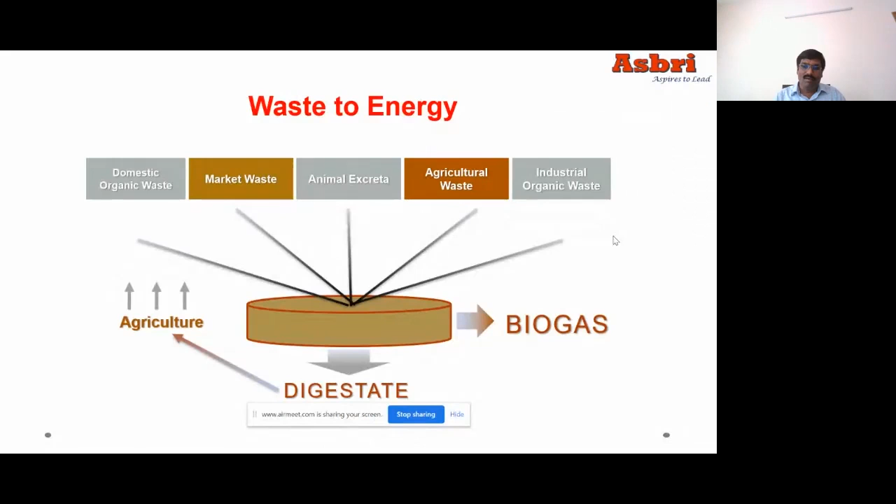Whenever we are designing a biogas plant, it should be a multi-feed system. As Mr. Colonel Rege was mentioning, we have to go ahead only with multi-feed, then we will not land in trouble. If you concentrate only on one waste, there will definitely be issues in the future. The digester may treat domestic waste, market waste, animal excreta, agricultural waste, or industrial organic waste. Our digester should be able to treat whatever organic material is available, and convert it into biogas and agricultural manure.

This biogas plant is a green solution. The highest revenue when we produce gas is from cooking gas, as we can sell this biogas by replacing commercial LPG, giving more revenue. The second option is automotive fuel, which is gaining momentum now because of the SATAT scheme. The last option may be electricity generation.

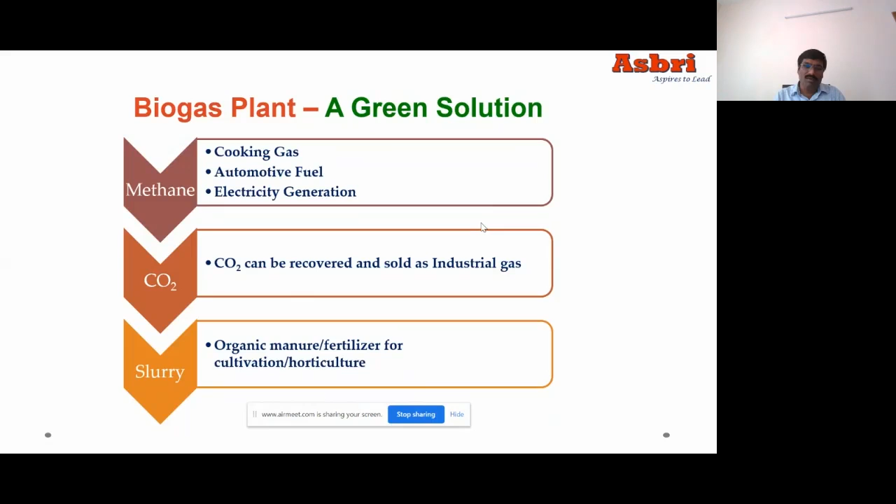Even with advanced new technologies, we are going for CO2 bottling. Biogas has 60% methane and 40% CO2, so the CO2 can also be recovered and sold as an industrial gas, used for welding, fire extinguishers, and other applications. Now we even have the technology to make food grade CO2 out of this biogas. That much advancement has happened. Whatever slurry comes out, we convert into fertilizer. So whatever waste comes to our plant or site, nothing will be wasted—one becomes fuel, another becomes industrial gas, and another becomes manure.

In municipal solid waste, the way is to extract the organic waste out of the mixed waste, then produce gas. Then we need to upgrade or purify it as per BIS 16087 norms, where methane should be above 90% and CO2 less than 4% is a major criteria, H2S should be less than 20 ppm level, and moisture less than 5 mg per metric cube. This is what we need to maintain when upgrading the gas. Once upgraded, it can be used for any application like industry, canteen, vehicle, or whatever is needed, and manure can be used for landscaping or by farmers.

Usually in domestic and hotel waste, we get around 100 cubic meters per ton average gas production. In some cases it's even higher, when there's a very high amount of volatile solids present, we get more gas. Usually in market waste, it will be around 60 cubic meters per ton.

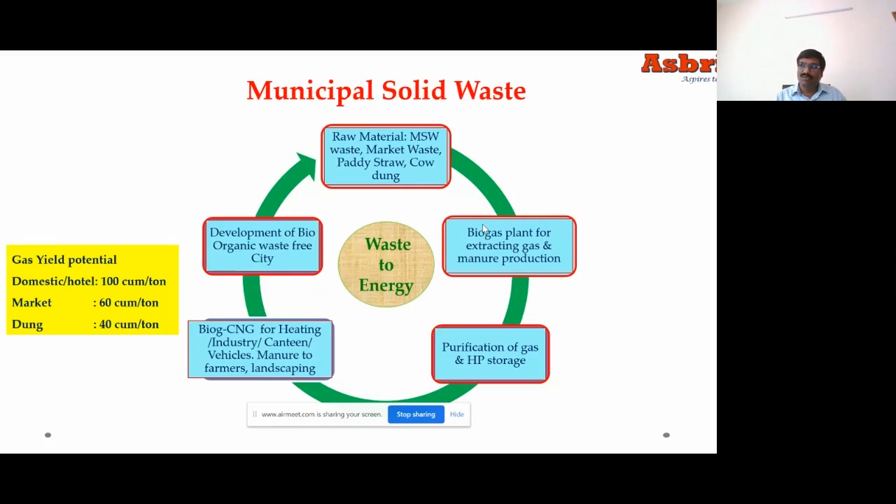Cow dung is the least in yield, but it gives very good stability to the digester. It gives around 40 cubic meters per ton. Usually this is the case in municipal waste.

As already discussed, various applications can be used. For example, when going for automotive fuel, we need bigger cascades to do that. And for restaurants and other applications, we have designed a 4-cylinder cascade which can take the gas, and through a PRS system, we can decrease the pressure required for the line pressure, and use it for any application.

What is the value proposition when we go for biogas? Usually this is better combustion than LPG, because LPG has a higher hydrocarbon, and here in biogas it's mainly methane. The carbon is a single digit number, and it's a zero residual gas in the cylinders.

In case of LPG, there will be some residue gas present in the cylinders, even though we are paying for the full cylinder. But here in biogas, a customer pays only the amount they are consuming, because there won't be any residue in the cylinders.

Faster cooking is achieved by regulating the pressure, because we have 200 bar pressure, unlike in the case of LPG. And it's carbon neutral, so it's a green USP and more.

Similarly, this organic fertilizer, as per FCO norms, should be rich in NPK. I think the cumulative requirement is around 1.5. Here we can get whatever is required. Over and above, the micronutrients are very high in this fertilizer coming out of these digesters, so we'll have a very good yield compared to chemical fertilizers.

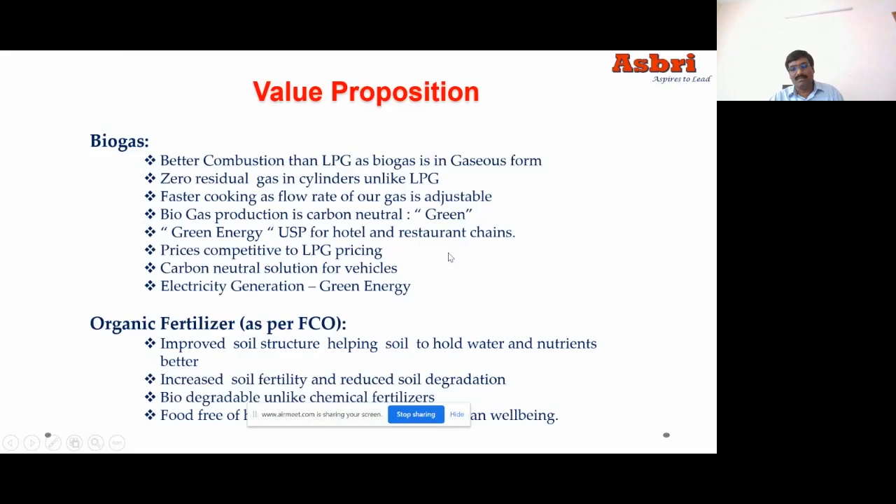Another concept we are now working on is carbon credits. If any company is not able to reduce their carbon emissions, they can opt for these bio-CNG projects. For example, for a 100 TPD organic based project, we can get 20,000 tons of CO2 emission equivalent reduced. One ton usually replaces 33 tons of CO2. That is the beauty of going for this bio-CNG project.

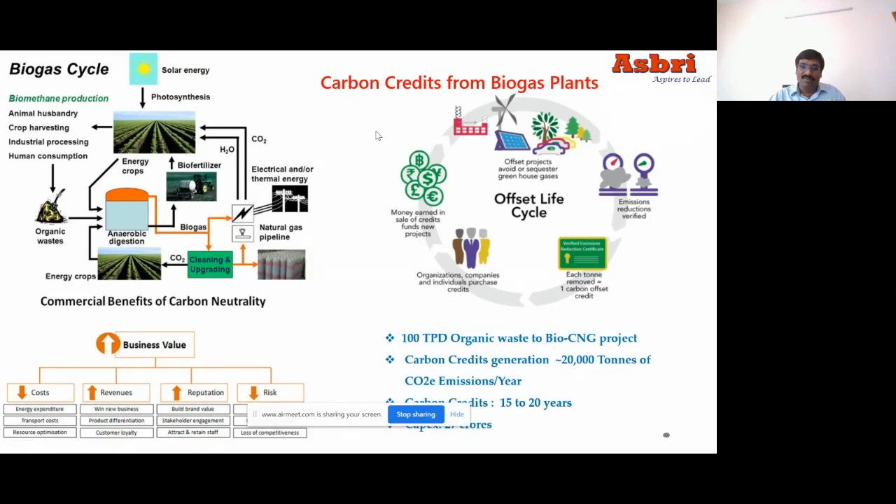At present, around 8 to 12 dollars is the carbon credit rate - that is, 8 to 12 dollars is the fetching rate for this, and we are working in India also to bring the same concept.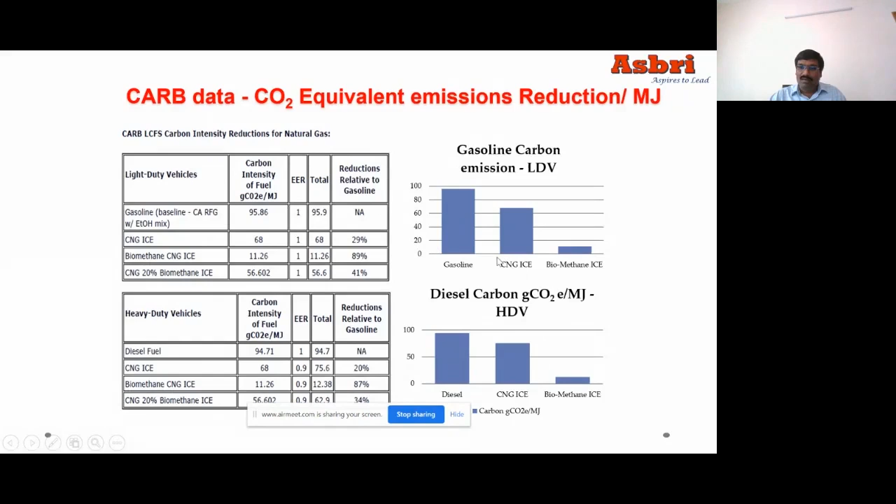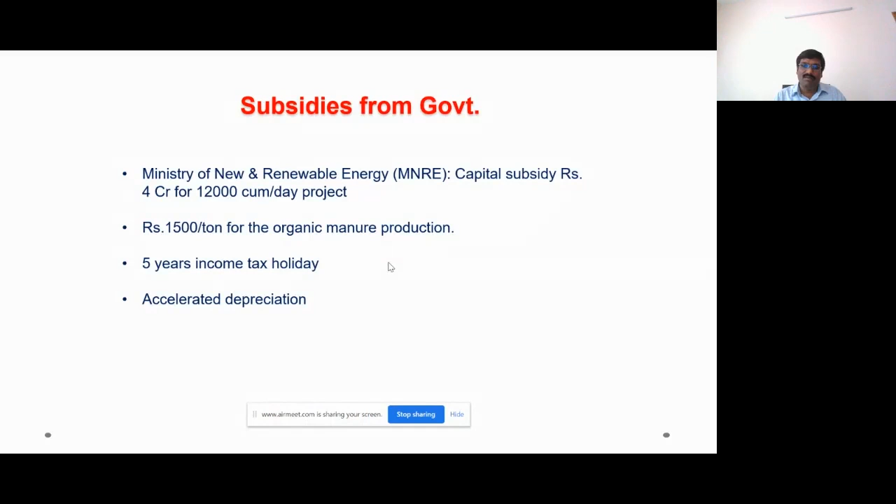As you are aware, MNRE now gives around 10 crore as the maximum subsidy per project, and for a 12,000 cubic meter equivalent, you will get around 4 crore. Similarly, for organic manure from MSW, you get 1,500 rupees as a marketing subsidy. I think 5 years is the income tax holiday for this project, and we even have accelerated depreciation.

Statutory requirements like PCB, PESO, and state fire and factory license are required when you want to establish a project across India.

How do you choose the right technology? Now we'll come mainly to the technology focus. The key elements are what kind of raw material you are using, and based on that, what pre-treatment is required to enhance gas production, and what AD process to use, whether mesophilic or thermophilic - all these things we need to consider.

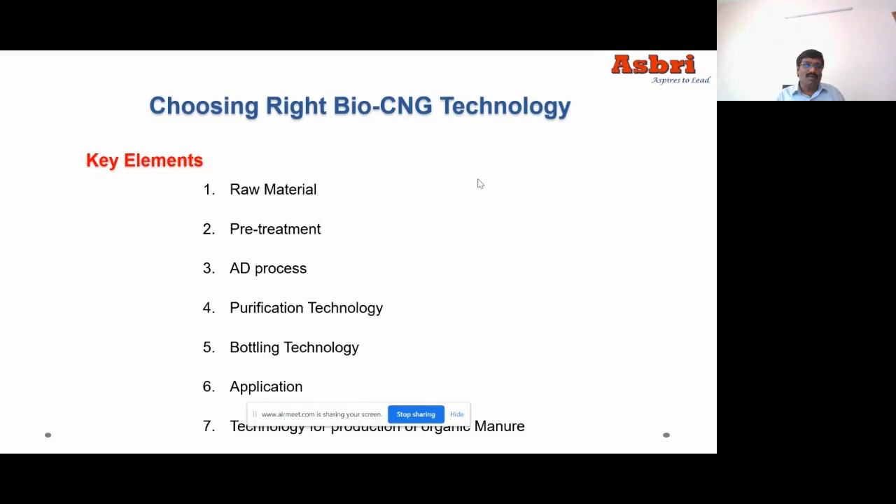Similarly, the purification technology, whether PSA, membrane technology, or amine technology, needs to be chosen based on the methane slip and other parameters, and whether we are going to bottle it or inject it into the grid. This is the new concept now - injecting into the grid. IGL has already started this work. Moreover, what kind of application we are going to use it for, and finally what technology we need for manure production - the cost effective and right technology is very important.

When we have, for example, biomass to energy like paddy straw or corn silage and other agricultural residue, it requires pre-treatment mainly because it has a higher lignocellulosic content. You need to break the lignocellulosic matter, and because of that, you need pre-treatment. There are different kinds of technologies available, and at present we are using technologies like steam explosion and extrusion.

Other than that, MSW projects need better segregation and other pre-treatment requirements, and defibering is also a new technology emerging now. Food waste to energy is pure organic waste, so there won't be much issues on the technological front. Similarly, bio waste like press mud, poultry litter, and cow dung requires a very normal technology to process, so you don't need much pre-treatment for this bio waste.

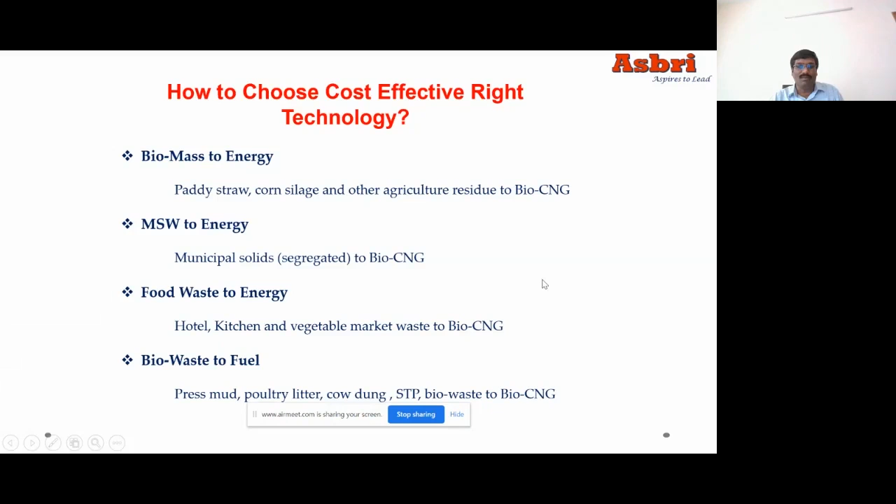I think the various AD processes have already been covered, so I'll skip this. When choosing a digester, as I already told you, in Indian conditions we usually go for mesophilic digesters. Why? Because our temperature across more than 9 months across India will be around 30 degrees.

Only in December and January, somewhere in the northern states, does the temperature come down, so we can have a heating system inside the digesters to cope with the temperature. Thermophilic digesters usually record elevated temperatures, but in that case we'll be losing energy. So that is why in Indian conditions we always go for mesophilic digesters, which is very useful.

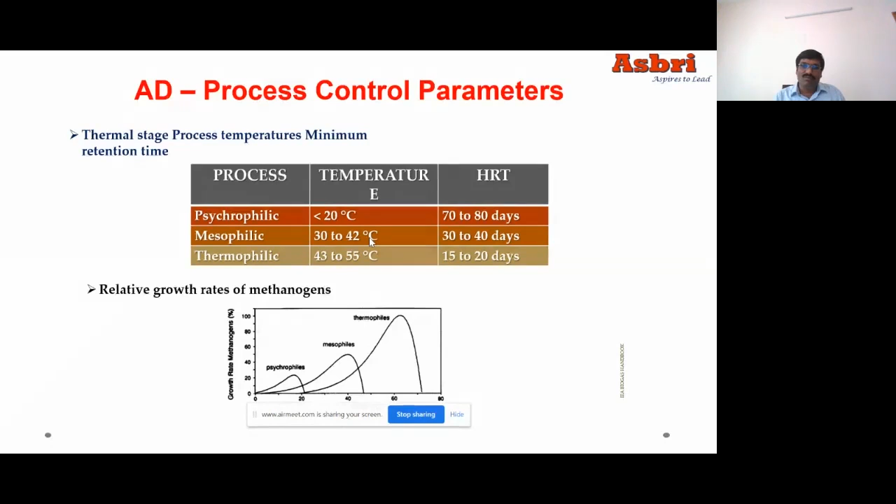But in case of the HRT period, if you compare, the thermophilic digesters have a much lower HRT, while mesophilic has around 30 days.

That is the requirement. When you design a digester, once we collect the organic waste, it comes to our station, then according to the requirement you need to do the pre-treatment. In the digester, we need to maintain certain parameters, the first and foremost being pH, and another one is the C:N ratio - carbon nitrogen ratio - then hydraulic retention time.

It depends on that - we need to vary the solid rates, and similarly the organic loading rate. Temperature is another parameter; variation in temperature reduces gas production. Similarly, the solid content - usually in mesophilic digesters you need around 15% solid content - and the number of stages actually increases efficiency, and the feeding mode, whether batch or continuous. All these things need to be decided beforehand when we go for a project.

Once we get the gas, there's post treatment, and those are very standard processes, and similarly the digester will convert into gas. This has already been shown - these are projects done under my guidance in Indore Municipal Corporation.

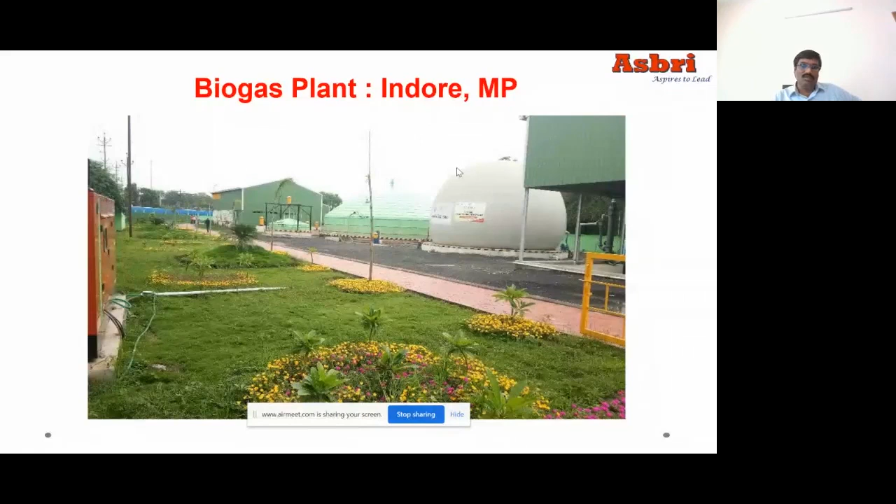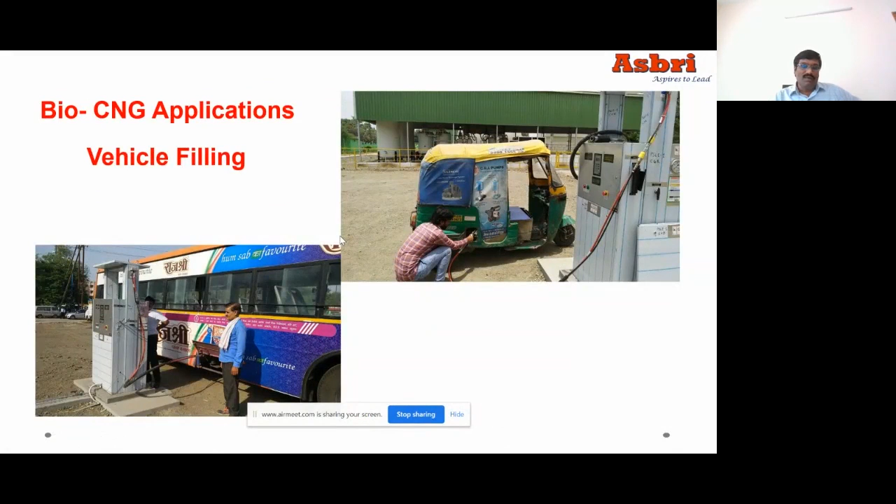These are 20 TPD projects. You can see here we have gone with the vehicular application - we are filling the gas into vehicles, and similarly auto rickshaws, whatever is there. We are even giving our gas to IIM Indore for cooking applications.

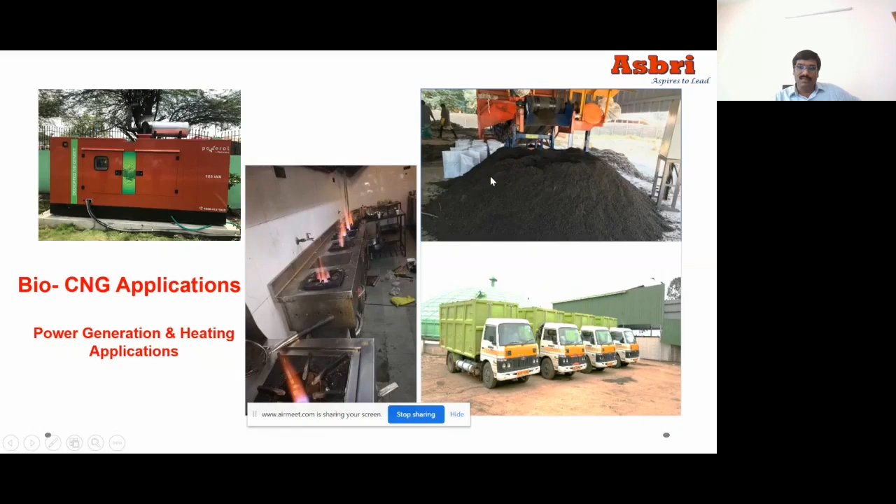These organic manures we have generated, we are bagging and selling at a premium rate by mixing microbes along with it. We have even proven that the organic manure, after mixing with these microbes, gives 25% higher yields compared to chemical fertilizer. So if a farmer wants to use this fertilizer, they no longer need to choose chemical fertilizer.

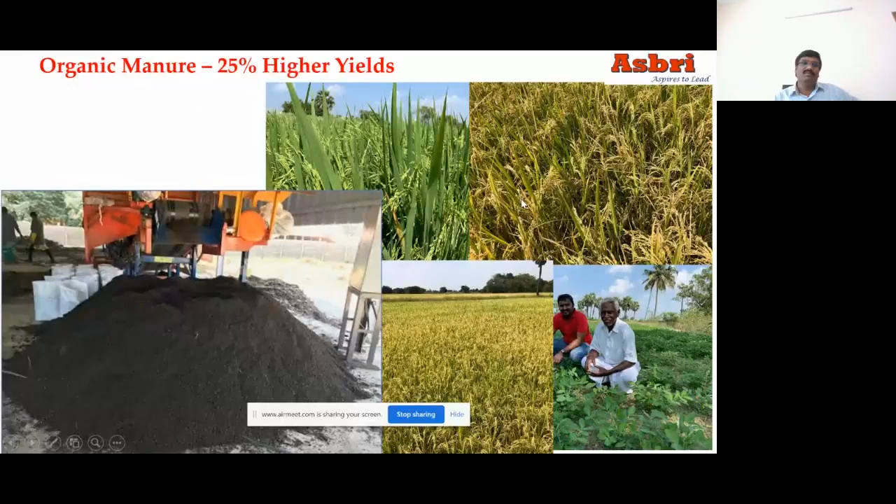Gradually, over a period of 2 to 3 years, a farmer can 100% convert to organic manure. At present we are doing this process at Greater Chennai Corporation - a 100 TPD capacity project, with IRM energy. The processing capacity is, as I said, 100 TPD given by the corporation, estimated to produce around 10,000 cubic meters of biogas and 20 TPD of bio-manure, which we can give under such a scheme. This is a good model - this is the project we have taken, and here's the process flow diagram of the project we are doing there.

So whatever waste comes from the various hotels, industries, and other sources will be collected and sent to the pre-segregating unit. It's a mechanized one, so there is no requirement of manpower or manual interaction. You just dump it in the hopper, and from there everything is automated - the segregation, grinding, separation, and pumping.

From there we go to the digesters. Whatever slurry comes out will be converted into manure, and whatever gas comes out will be purified and used for various applications like electricity production, vehicular fuel, or LPG equivalent fuel.

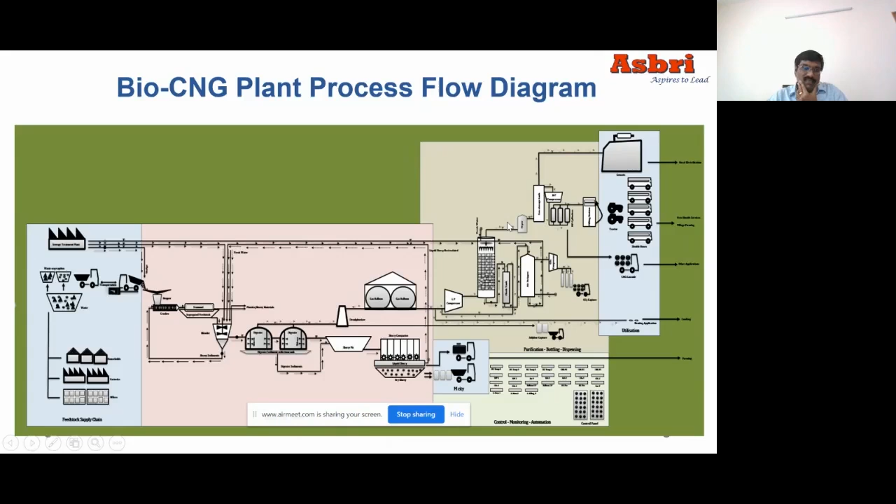This is the process flow diagram we are following in one of our biggest projects, the 100 TPD project in Chennai. Another project, as I mentioned, is with a city gas distribution company - we've already started construction. It's a 100 TPD project for paddy straw conversion.

It gives around 30,000 to 40,000 cubic meters of gas. That means per ton will yield a minimum of 300 to 400 cubic meters of gas. It depends on what pre-treatment technology you are using.

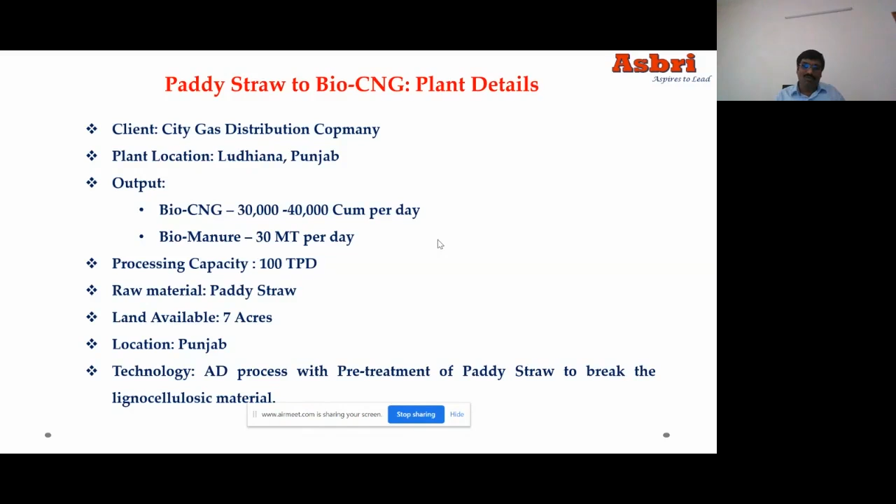Whenever you go for a project, the important phase is the project feasibility study and getting the land. The feasibility study usually takes at least 1 or 2 months - you have to see what kind of raw material is available. Not just one type, as I told you, you need at least a few more raw material options, and similarly the water sources. Then land allocation or acquisition depends on the project, whether it's MSW or other types.

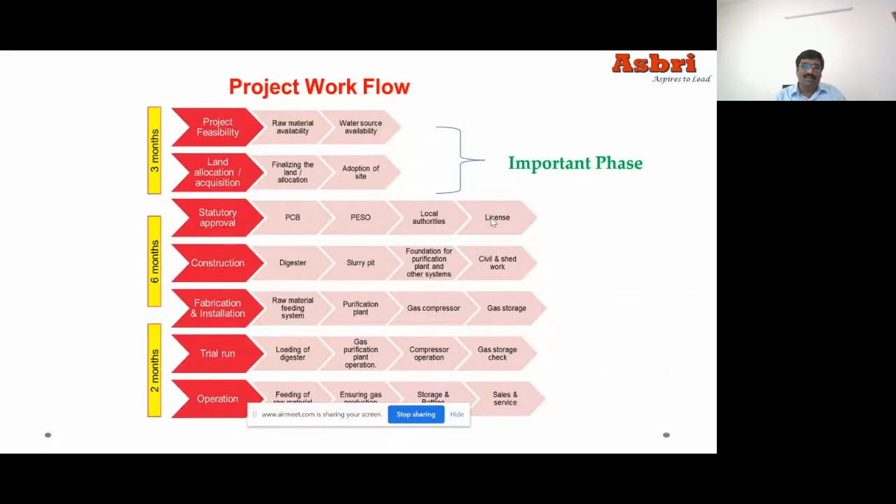Once you are confident, you go for the approval process - PCB, PESO, explosive department, and other licenses. Then we enter construction, fabrication, installation, and trial run, and finally hand over the project to the end user. We can do the entire turnkey job.